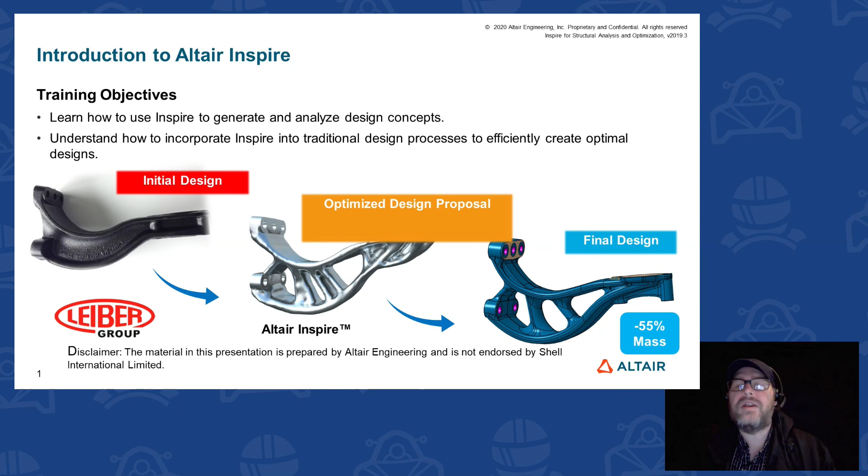So using the Inspire software, what we can do is we can take this original design and very quickly, very easily come up with an optimized design. This is an example of what Inspire is going to provide us. You see, it's removed portions of this material. It's determined where material is necessary and got rid of the rest of that material. And then from that, we can then come and engineer our own design, taking cues, taking information from the optimized design, come up with an engineered design right here that is an incredible 55% reduction in mass.

Another added advantage of using a simulation-driven design process is, compared to a conventional design process, which is to come up with a design, test it either virtually or physically, and then determine where it can be improved, and ultimately come up with a new design that we're going to test again - this can be a long process.

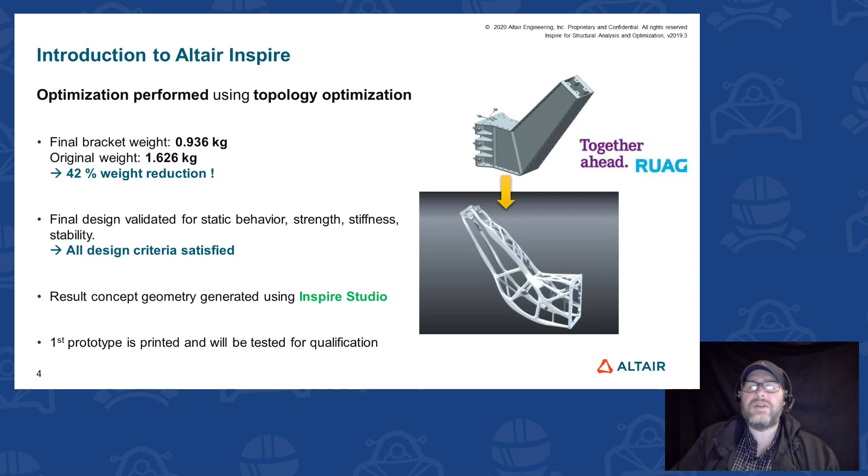So, as I promised, this is all I'm going to do from a slide standpoint. The rest of this is going to be a live demonstration of the software. So I'm going to open up the software here, and we're going to move on and do all of the things that are necessary to achieve these goals.

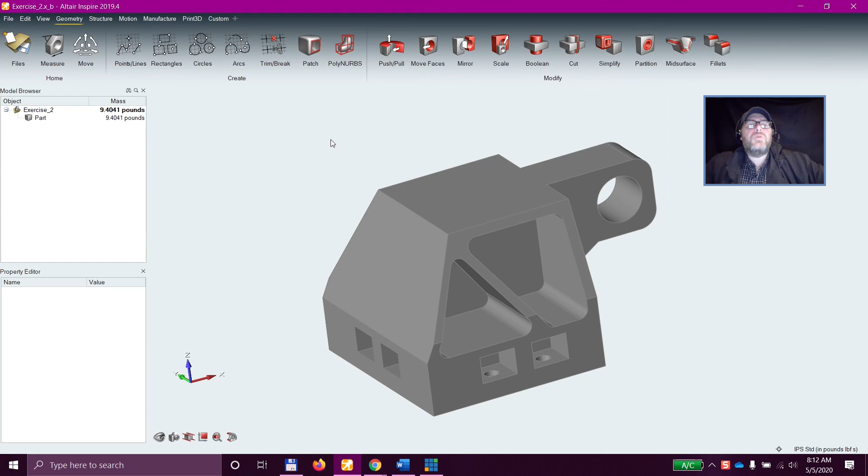So I've got my geometry here, and with this geometry, what I can do is come here and begin to set this up for an analysis. And to do that, the first thing that I want to do is make sure that this part is made out of the correct material. You can see it says 9.4041 pounds here. What I want to do first of all is I want to change the units that that's in. Changing the units is very, very easy.

All I have to do is come here to the corner, and in the corner here, I get a list of all of the common unit schemes. I'm going to move over to a millimeter Newton second unit scheme, and you can see it updates that. Because I'm working in millimeters and newtons, the mass is then going to be calculated in metric tons. But you can see if I instead switch to a millimeter Newton kilogram scheme, now it reports that in kilograms.

Units are very, very easy within Inspire. All I have to do is switch the scheme to whatever I want it to be, and the part will automatically update to that new unit scheme. All of the dimensions on the part will automatically change. Any loads, anything that I've put on here will automatically update to whatever unit scheme I'm in.

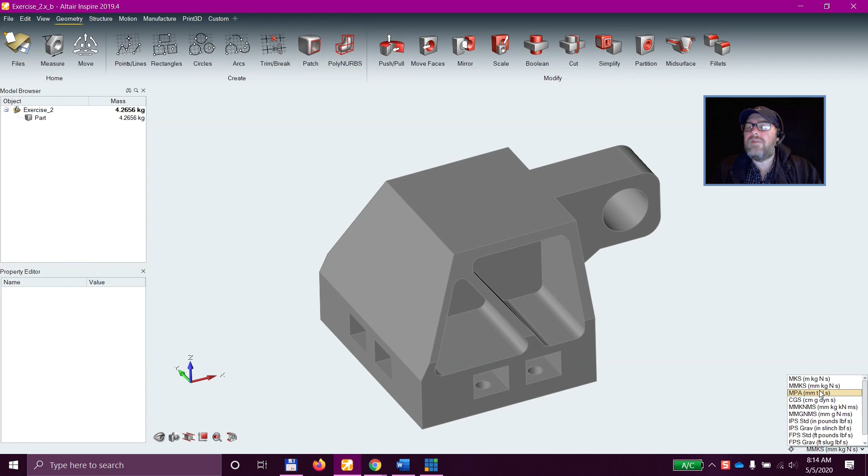So I'll leave it in millimeter Newton seconds right here. That way I know that my results are going to be in megapascals, and I can always quickly convert back over to kilograms just to get an idea of the weight, the mass here. So you can see we're at 4.2656 kilograms. The part is automatically assigned a material when it's loaded in, and that default material is a steel AISI 304.

But the first thing that I want to do is make sure that I assign this a material appropriate to my design. So if I right-click on this, you'll see I get a list. If I come to material, I get a list of all the materials here. Everything from steel, AISI 304, the default material, down through plastic, nylon, and ABS, which are useful for 3D printed parts. This all comes with the software. It's a library of materials that comes with the software, and I can select from any of those.

In fact, I'm going to select aluminum 7075 T6. And you see, as soon as I do that, if I switch back to kilograms real quick, you see we've had a tremendous weight reduction already just by making this out of aluminum.

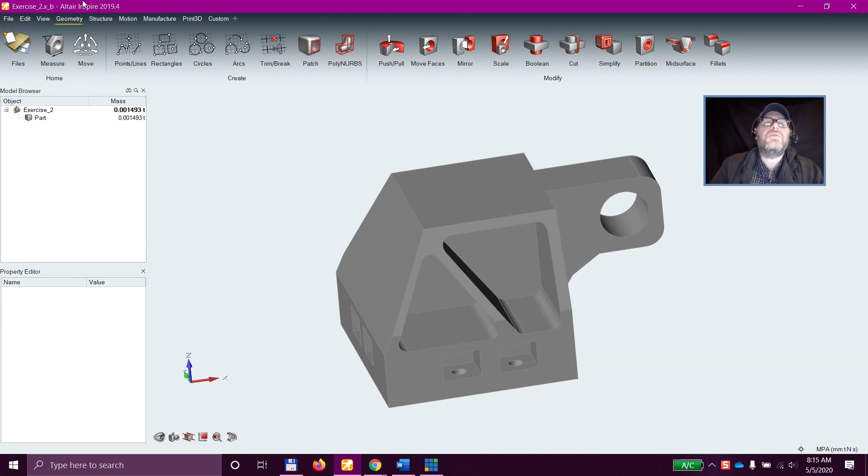But oftentimes, we're going to want to use a material that's maybe not on that list of materials. Especially if you have the specifications for the material you want to use, all we have to do is come to the structure ribbon here, come to this materials option. It's going to list all of the parts in my model and the material associated with it. But in this case, what I want to do is come over here to my materials, and you'll see I have two of them put in here. Douglas fir, I was doing some work with some wood, and then just one that says Erik's material.

All I have to do is click plus. It's going to add a material to this, and then I just need to enter in the values here. The E, the Young's modulus, the nu, the Poisson's ratio, the density of the material, the yield stress, and if I'm planning on doing a thermal analysis on this, the coefficient of thermal expansion. And as I switch from unit to unit, you'll see that those will adapt to whatever unit scheme I'm in. So we'll leave it in MPa.

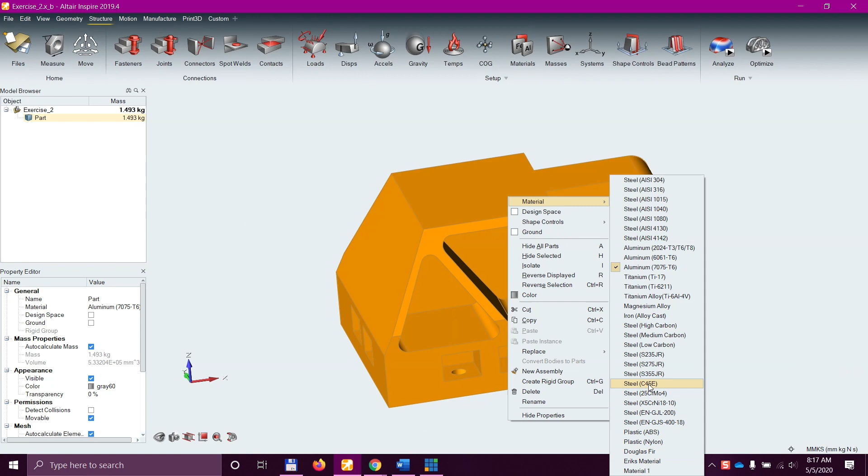And I would just put in the material specifications there. As soon as I do that, in the right click here, you'll see that new material is available in this library. So we can add as many of our own custom materials as we want. But as I said, I'm going to leave it on aluminum 7075 T6.

So ultimately, I'm going to want to optimize this part. I'm going to want to create a design that is as lightweight and efficient as possible, but able to support the loads that I put on it. To make sure that I am working intelligently, the first thing I want to do, though, is run a quick baseline analysis. It's always important to know where we are now, so that when we go to the optimization and we get an optimized part, we want to make sure it at least meets the specifications that I've got right now.

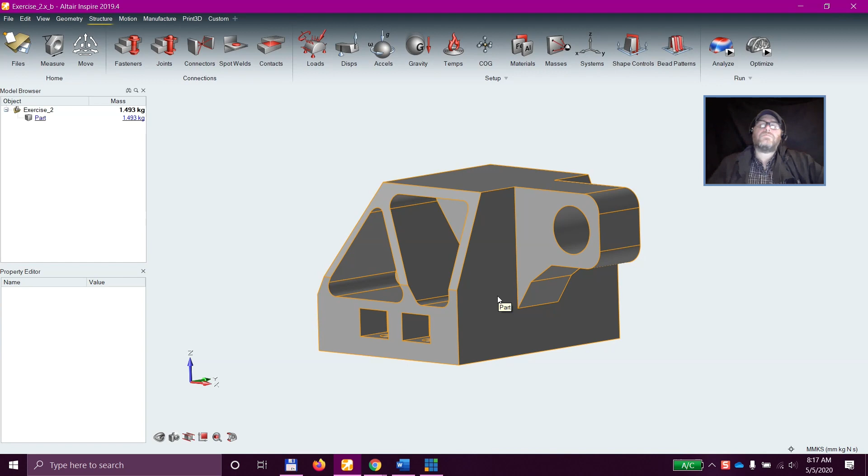To do that, I'm going to need to set this up to be a linear static analysis. Linear meaning we're dealing with material in the linear range, and static meaning the part is going to be held in place, fully constrained, but allowed to deform locally. And we'll get set up with that, but one of the first things that you're going to want to know as you begin to utilize Inspire is how to manipulate the part.

And the default mouse manipulation within Inspire is holding down the middle mouse button allows me to rotate the part. You'll see that little X there is what I'm rotating around. If I want to pan the part, I hold down the right mouse button and move it back and forth, up and down. I can pan that. And if I want to zoom the part, I just roll my scroll wheel. As I pull my scroll wheel toward me, it's zooming in, using the pointer as a focus, or push my scroll wheel away and it zooms out.

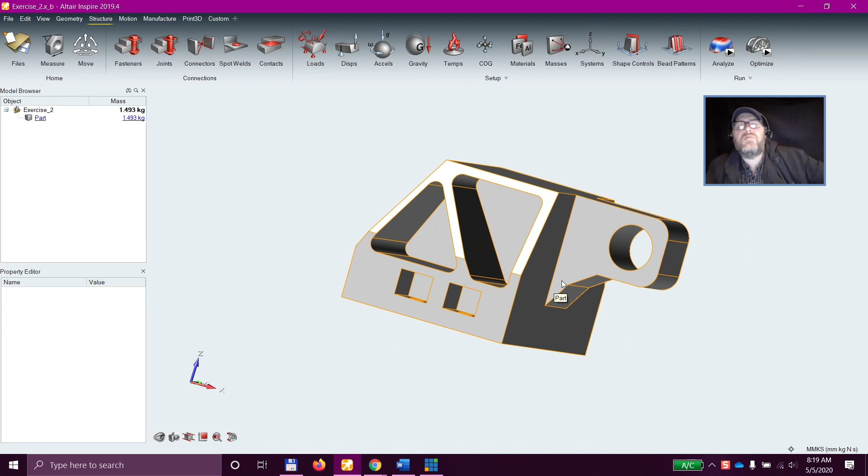But one of the most inconvenient things about moving from software to software, especially GUI-based CAD-type softwares, is every single software seems to have its own unique mouse manipulation. We wanted to get away from that. We wanted to make sure that a transition from a CAD software like SolidWorks or CATIA or UG, Pro-E, into Inspire was as seamless as possible.

If you come to the File pull down here, and you come to Preferences, and then you select Mouse Controls, you'll see that the default mouse control is what I explained here, and I can click on those and change those to whatever I want. But if I click that word default, it's going to bring up a list of very common CAD packages. SolidWorks, I know, is a very popular one amongst students. If I select that, you'll see it's going to say now default settings for SolidWorks.

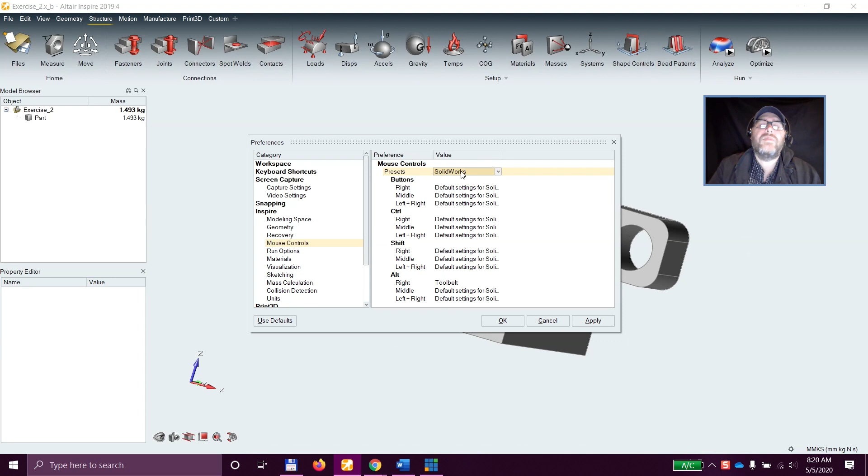So whatever the pan, zoom, and rotate mouse manipulations are in SolidWorks, now that's going to be the way that we do it in Inspire, which means moving from SolidWorks into Inspire becomes as seamless as possible. Now I don't use a CAD software, so I just stick to the default within Inspire. So I'm just going to select that, but hopefully this will make things a little bit easier, a little smoother, and a little more comfortable for you as you transition your geometry from your CAD package into an analysis tool like Inspire.

So with that said, the very first thing I need to do now to actually run this analysis is I need to indicate how the part's going to be held in place. I did say it was a static analysis. So for it to be a static analysis, we need to make sure that the part is fully constrained somehow.

And I'm going to make sure I'm in my structure ribbon here. And when I'm in my structure ribbon, I just come over to the loads icon. And you'll see when I'm in the loads icon, or many of the icons within Inspire, these icons are not just push a button and then open up another menu and then push a button and open up another menu. All of the functionality is right here on top of this icon, because what we were able to do was introduce the idea of what we call multi-function icons.

What a multi-function icon does is it takes very similar tools, very similar functions, and combines them all into one icon. So this is not just a button to push, but actually a collection of buttons that form this image. And we made it a very large, very descriptive image here. So if I want to create my supports, you can see I've got these little cones supporting my part. If I move on to that, they turn yellow or get a yellow halo around them, and that means I'm creating supports. If I come up here to this force vector here, I'm applying a force.

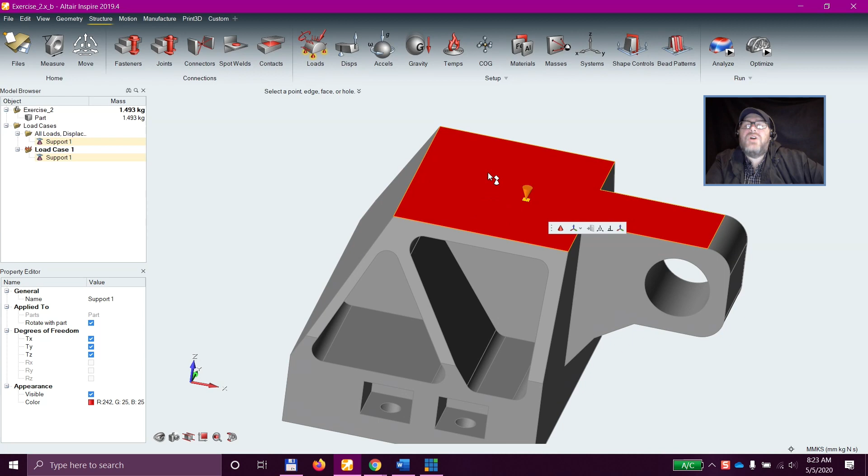If I double click on this, I get these little arrows here. Right now, since all of the arrows are faded, the part is fully constrained. But if I select any of these arrows, that arrow turns green. And now if I right click to get out of the function, I get these little roller wheels indicating the direction that this is now allowed to move. So I have freed it up in the direction, which happens to be the Y axis there. So it can't move up and down in the Z, it can't move forward and backward in the X, but it can move in the Y direction.

And if I need to free it up in a direction that isn't aligned with one of the cardinal axes, again, it's very easy. All I have to do is double click on that, and I come to this little universal moves tool here, and it allows me to rotate that about any of the axes, either in 5-degree increments or typing in whatever amount I want, and it will align to that. And you can see now the roller wheels are pointing into that direction, 37 degrees off of the Y-axis.

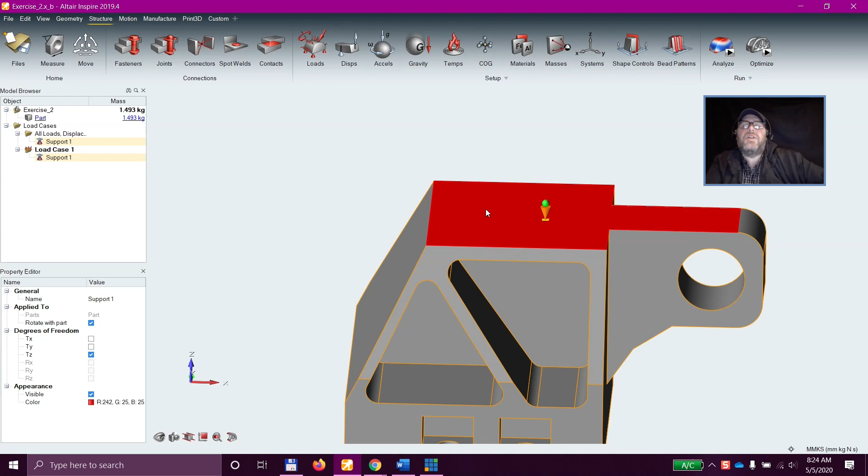If I select the other in-plane arrow, you see now I get this little caster wheel on here, and that now tells me that it's free to move in plane, but it can't move out of plane. So I can create very unique, very custom, very complex supporting schemes by manipulating those arrows right there. Now, of course, I don't want to constrain that in that direction. What I'm going to do is I'm going to constrain it down here in these bolt holes.

So when I'm in support, it did say I could do a point, an edge, a face, and those act the same, or a hole. And in this case, these holes are where this part is going to be mounted onto the aircraft. This is, as I mentioned, an aircraft door hinge bracket.

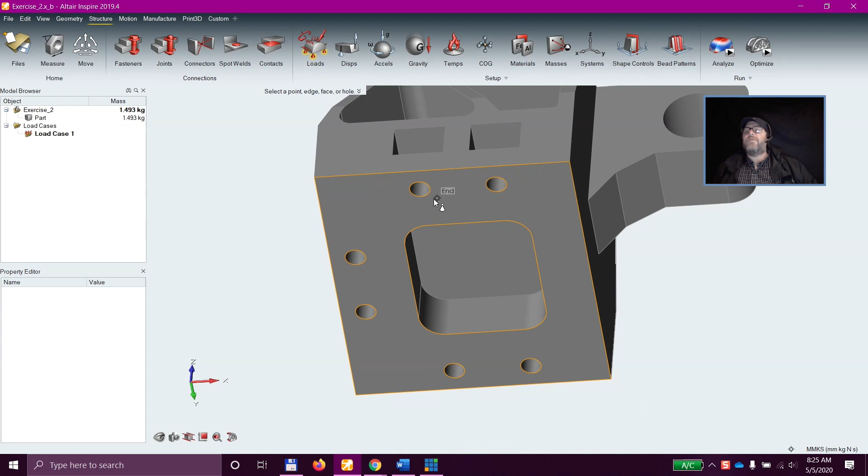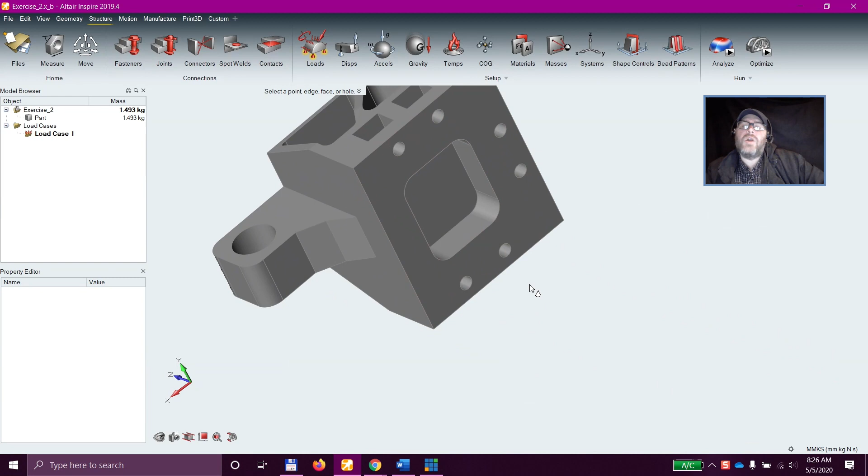So to make sure that I model this in the way that it's going to be mounted into the aircraft, what I want to do is hold on to these 6 bolt holes here, and I'm going to do that by applying my constraint, my support, to a hole. And when I click these holes right here, I get a slightly different icon than I was getting before. This icon is unique because Inspire is recognizing that this is a hole, and that there are typically unique properties to a hole constraint. The majority of the time we're either pinning that hole, so holding it in place with a pin, potentially a clipped pin, or we're bolting in that location.

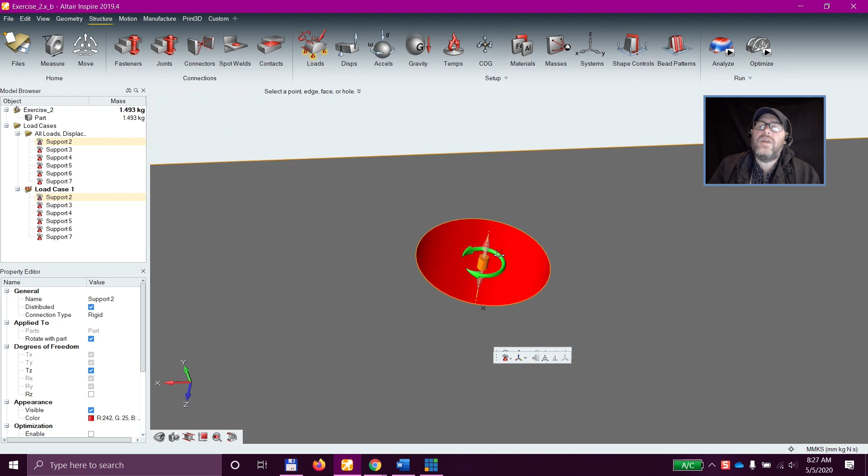So the constraint looks a little bit different, and if I double click on it, I get slightly different freedoms. The first of which is the rotation. If I free that up, I can allow it to rotate about the axis. So it's as if I've pinned it, but it's a clipped pin right now because it's not free to move along the axis. I can free it to move along the axis by selecting that. And those are the two freedoms that I can apply to a hole constraint, moving along the axis, rotating about it, either one or none. But no matter what, it will always be constrained normal to the axis, indicating that it's pinned or bolted in place. I'm going to leave these just as is.

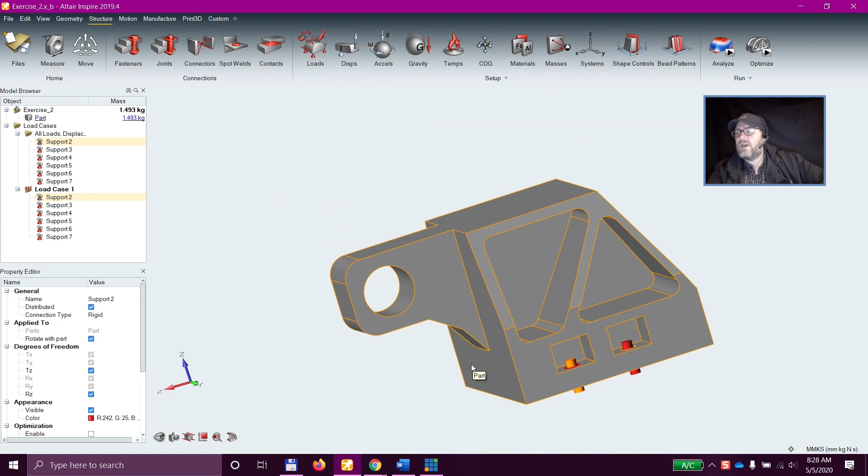And now what I've done is I've simulated bolting this in to the aircraft. It is now rigidly affixed in those locations, but the rest of the part is free to deform. That's important for a static analysis. And what's going to cause that deformation are the loads that we apply to this. So I'm going to come back to my loads icon, and like I mentioned, I can do a force that's going to be put onto a point, a face, surface, or a hole. I can do a pressure or a moment.

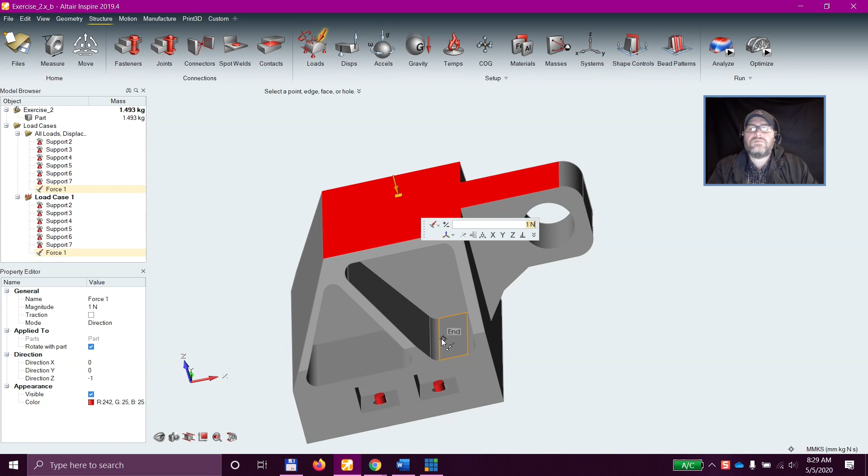I'm going to select the point force, and again, it says point, edge, face, or hole. And if I select a face, it will put that load icon wherever I indicated. But just like the constraint, because that entire face turns red, that means that this 1 Newton force is applied across and evenly distributed across that entire face. But let me select that. I'm just going to click my delete key to get rid of it. I want to apply it to the hole.

So I mentioned that the aircraft door hinge attaches to these holes here. So I'm going to put my force in the hole. It will put it at the center of the hole, but it will highlight that entire surface in red, indicating that the load is being applied to the entire surface. And I can select the direction I want that to go by selecting any of the cardinal axes, so X, Y, or Z, plus or minus to move it back and forth. Or just like I did with the constraint, I can get it generally aligned, come to my move force, and then rotate that in any of the axes to orient it in the direction that I want.

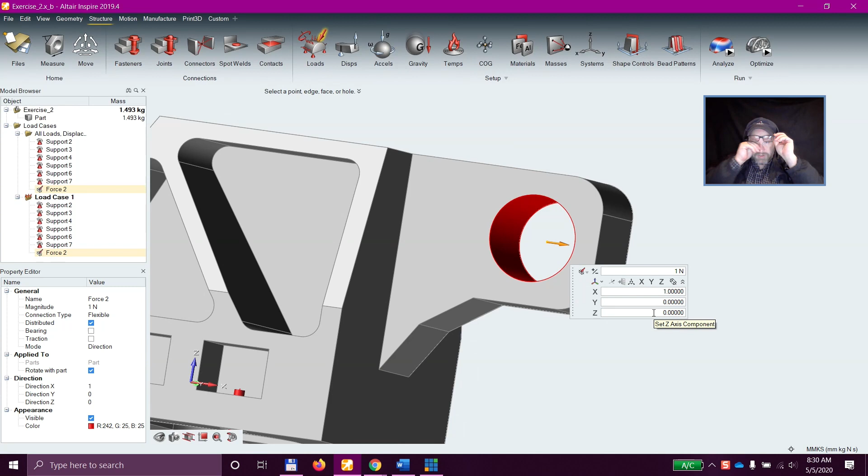And I would do that if I knew the angles off of the cardinal axes. Another way that I could do that is to use this little down arrow icon here. When I select that, you're going to see the portions of a unit vector. So if I know my vector components, I can come here and put them in. So say I know 3, 4, 5.

I'm going to align that using these as a vector for the orientation, but not touch the magnitude. Or if I switch this from a direction mode to a force mode, now these become not only components of the direction, but components of the magnitude as well. So as I change these, 3, 4, 5, it will not only change the orientation, but it will change the magnitude. So whatever information I have, I can orient this in the way that I want.

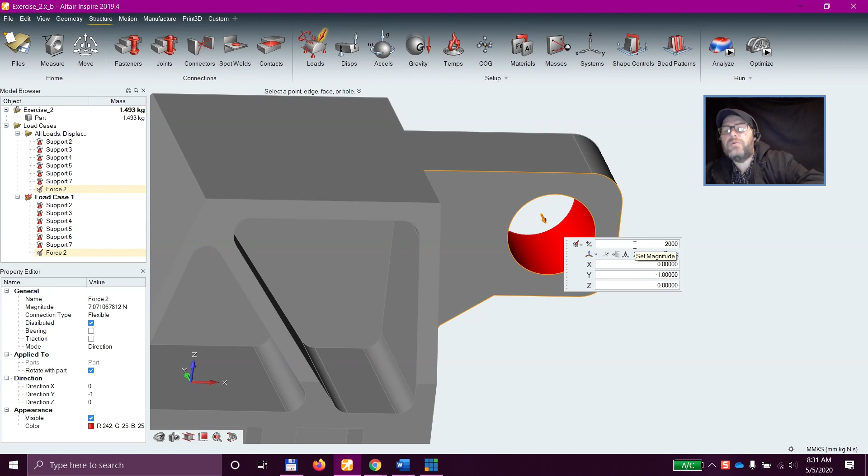What I'm going to do is I'm just going to orient this in the negative y-axis, and I'm going to put a value in here. So we'll say 2,000 newtons. Now this part is going to see multiple load cases. When this is mounted in place, this is going to represent a situation where the door is open, and the door hinge is pulling down on this.

But we're going to have another scenario where I'm pointed in this direction, and the arrow is going to be representing the force when the door is closed and that hinge is pulling on it. I've oriented it the way that I want. I can now again put in the value that I want.

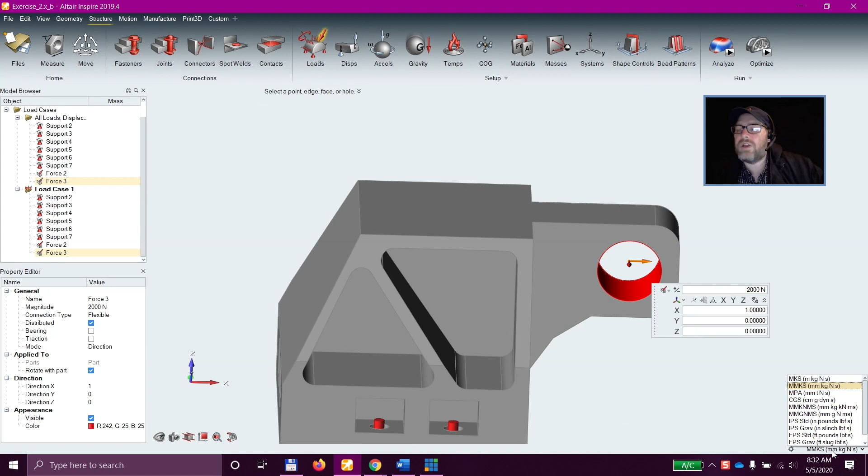But let's say, for instance, you didn't happen to know what the force was in newtons. Somebody had given it to you in pounds force. So I could go and do the calculation, go to Google and Google what is 500 pounds force in newtons. I could come down here and switch to pounds force, put 500 in, switch back to millimeters, Newton seconds, and have it convert.

Or if I come in here and just type in 500, if I clicked enter, it would be 500 newtons. But if I type in LBF for pounds force, you see it automatically converts that to newtons for me, or whatever my current unit is. So we do truly try to make units as seamless as possible within Inspire.

So now I've got my forces, I've got my constraints, I've properly assigned a material to this. The last thing that I need to do is differentiate between these two forces here. Right now, these are going to act at the same time, which of course is impossible. This door cannot be open and closed at the same time. But I do want to understand the behavior of this, and when I optimize this, I want to make sure that it is taking the information from both of these different load cases.

I'm going to come back to my load icon, and I'm going to select this right here, and I can add another subcase to this, another load case. And what that means is both of these will be analyzed, but they'll be treated as two separate events. So I will get two answers from the analysis.

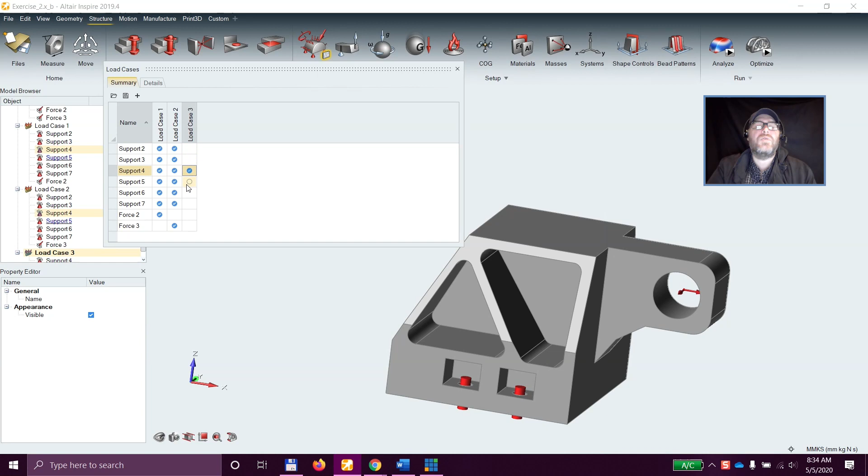I could even come in here and model a scenario where I'm going to assume that 2 of the bolts have broken, so I will not select support 2 and support 3. I'll just select these right here, and we'll say force 3, and I can continue to add different scenarios as I want. So now I have 3 different load cases, 3 different studies that I want to run.

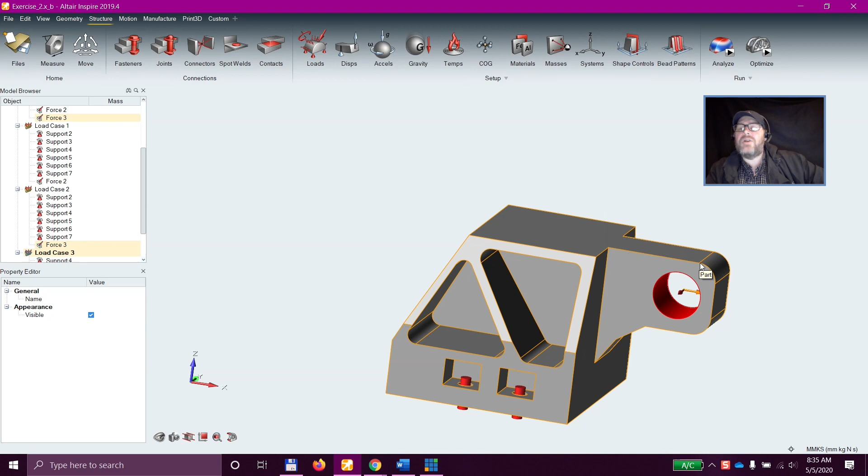I can apply what we call enforced displacements. Say I didn't know the load, but somebody loaded this up and measured that this point moved 4 millimeters. I could come to an enforced displacement, enforce a displacement on that point, say 4 millimeters, in whatever direction. That's the wrong way, so I'll click minus and move it down. You can see it's now indicated that point is going to move 4 millimeters. So what's going to happen is it's not going to load it, it's going to forcibly move that point 4 millimeters, and then I'll be able to find out what stresses incur as a result of that enforced displacement.

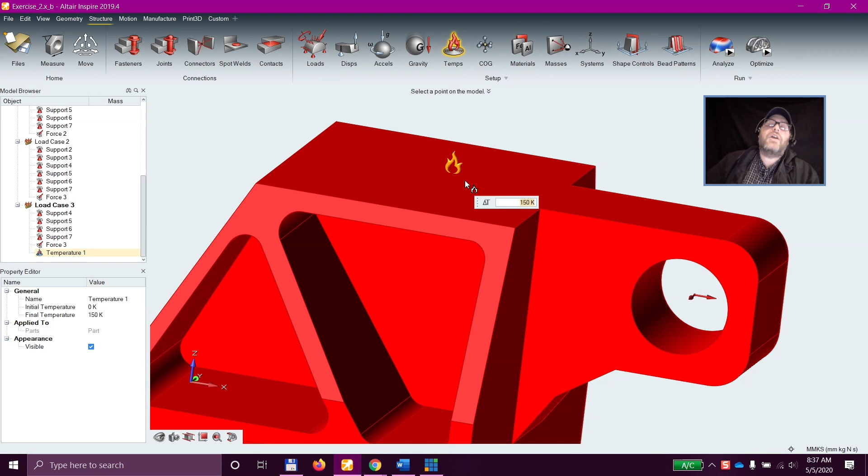Another way that I can load this part up: I can do G-loading, clicking on a part and G-loading it, or I can do angular velocities or accelerations. We'll come back to gravity when I come to run it. And I can do temperature loading. If I select that and pick my part, you see it indicates a delta T. So I could say 150 degrees Kelvin delta T, an increase of 150 degrees, irrelevant of what it started at. It's just a thermal load, so we'll get expansion if the heat goes up, and contraction if the heat goes down. I can do a thermal load as well, but let's delete that.

So those are the different loading scenarios that I can do. Everything is set up and ready to go. The last thing I need to do is just go and run it.

So the way I'm going to do that is move all the way down here to the end of my list, and we have our Analyze. If I click this little Run OptiStruct Analysis button, it's going to open up this window where I can name my analysis. If I'm going to be running multiple analyses, I always find it useful to change the name. Right now the name is just whatever the part name is, but I can change that, and that helps me differentiate between the different analyses, the different studies that I do.

You'll notice I haven't mentioned elements up till now. If you're familiar with finite element analysis, you know all of these analyses are element based. As a teaser for tomorrow's session, which deals with SimSolid, that's actually a geometry-based analysis tool. So stop by if you're interested in seeing an incredibly quick analysis that doesn't even use elements. But this is an element-based analysis, so it has automatically calculated a global element size. I can change that if I want, but I'll leave it alone.

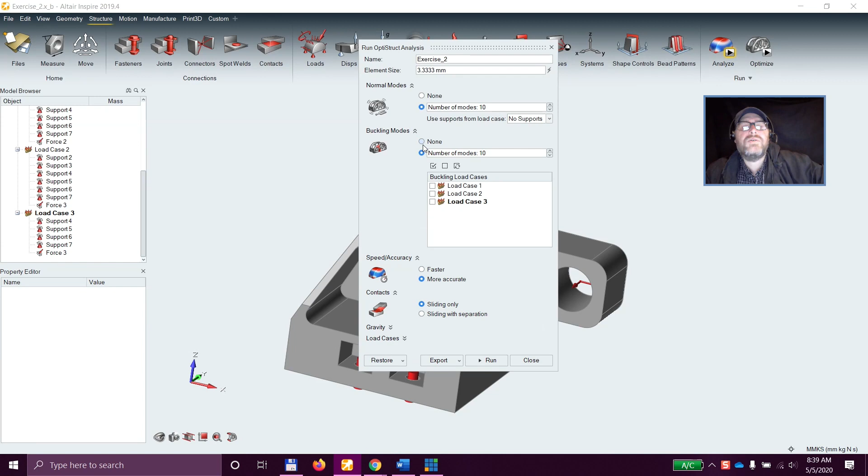Speed versus accuracy, I'm going to leave it at more accurate. I do want accurate results, so I want to make sure they're as accurate as possible. I always recommend doing it more accurate. The only time you'd want to do faster is if your analysis is taking an inordinate amount of time and you just want rough results quickly. The results will be good, but not as accurate as possible. If you're interested in the details, more accurate uses second-order quadratic elements, and faster uses first-order linear elements.

Contacts, we'll get to that in a bit, so I'm just going to leave that as is.

Gravity, do I want to incorporate gravity into this analysis? Right now it's set for no, and that is the default. What that means is it's just going to assume no gravitational effects. And on this part, that's perfectly fine. The part is relatively compact. It's not going to experience gravitational effects of any discernible amount.

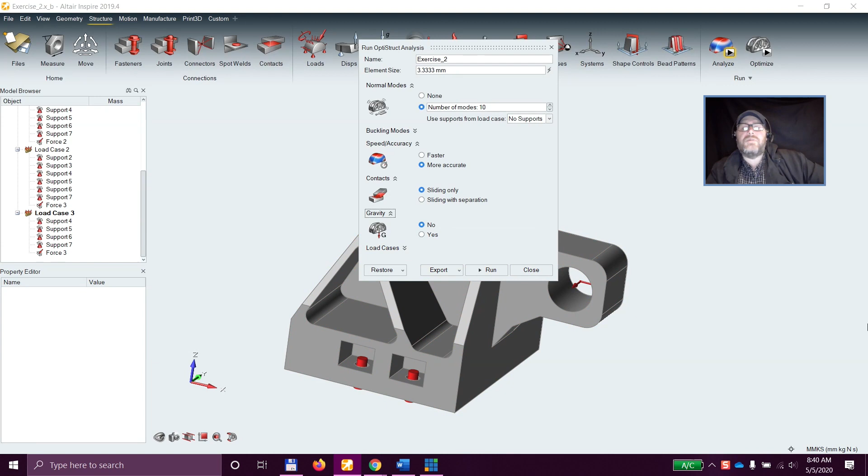If it was maybe something really cantilevered, I'd turn that on, and then I'd need to come here to gravity and make sure gravity is pointing in the correct direction. Right now it's not. In this case, gravity would be pointing in the negative z-axis.

And then the gravitational acceleration is set for Earth standard. Maybe someday we'll have Shell Eco Marathon Lunar competition, in which case we'd want to change this gravitational acceleration. But for the foreseeable future, we're doing this on good old Earth.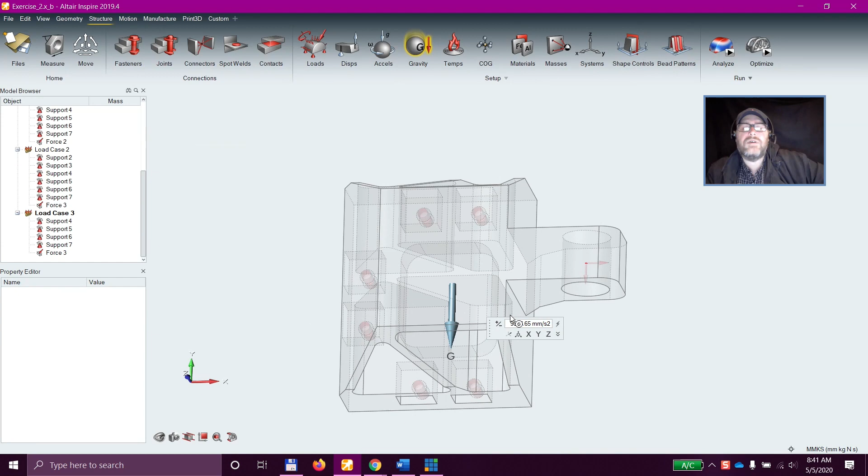So we'll leave it default for what it is. If you do need to do a G-load, don't mess with this. It's better to actually do a G-load up here where I can specify a specific G-load and just leave the gravitational acceleration alone. But as I mentioned, there are no gravitational effects on this, or no discernible ones, so I'm going to leave that off.

The final option here, load cases. Which ones do I want to analyze? I want to say all of them, and all I have to do is click run here, and we'll run the analysis. And what it's going to do is it's going to go through and set this up for an analysis.

Now, the power of Inspire is the fact that while this is incredibly easy to use, incredibly quick to set up an analysis, it's utilizing in the background our enterprise level tools. What it was doing was first it sent it off to our batch meshing, our auto tetrameshing tool, SimLab. SimSolid is what we're going to discuss tomorrow. SimLab is our tetrameshing, auto meshing tool to create a very high quality tetramesh.

Once it was done with that, it sends it to our pre-processing tool, HyperMesh, where it's going to actually take that mesh and then set up all the parameters for analysis, or as we ultimately get to it, optimization. And now when it's about two-thirds of the way across here, it's now sent it to OptiStruct, our high-end, very, very accurate analysis and optimization solver, and it's running that quick solution right now.

That should be done relatively quickly. It is going to take just a couple of minutes here, where it will return some result.

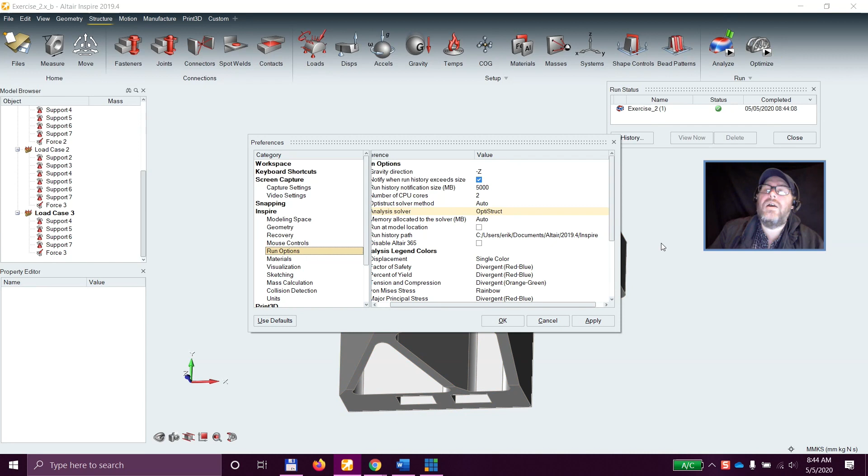But because I am taking this from an analysis to an optimization, I do need to leave it in OptiStruct so that we can utilize the incredible optimization capabilities of OptiStruct. And fortunately, in the time that I discussed that, it has completed. We get our little check mark here. We get our little green flag letting us know that we've solved, we've come up with a solution.

I click that green flag, it will automatically take me into post-processing mode. And in post-processing mode, I can view all of the different result types that I have: displacement, factor of safety, percent yield, and my stresses. And I can change that between the different load cases.

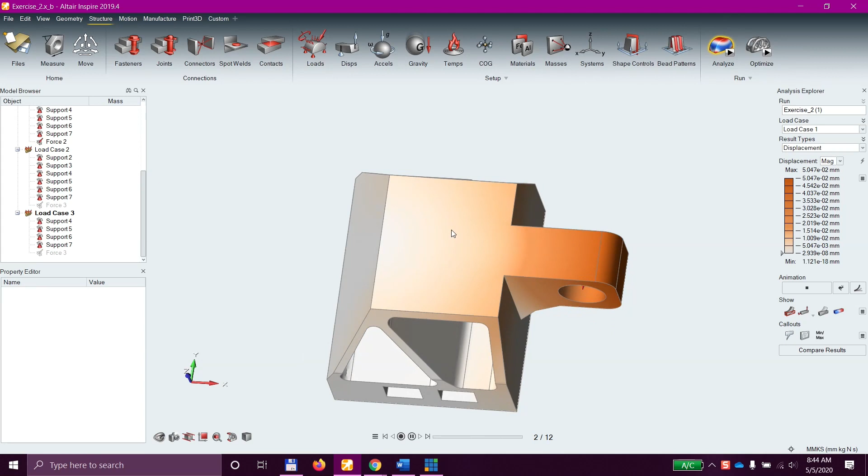Additionally, I can animate it. So if I click the animation, it's going to show me, based upon load case 1, what the animation, the deformation of this is. It is an exaggerated deformation. This is not how much this part is moving. We exaggerate it because we want to see the behavior of it.

If I come here and I see that this is actually 376.5 times scale, if I turn that off and select 1 time scale, you can't even see what the deformation is until you really zoom in very far. Not very useful to me. I need to understand the behavior of this, not necessarily the exact amount of deformation.

That I can get from my chart up here, my legend. These numbers are correct, but the animation is exaggerated so we can understand the behavior. I can come down and take a look at my stress.

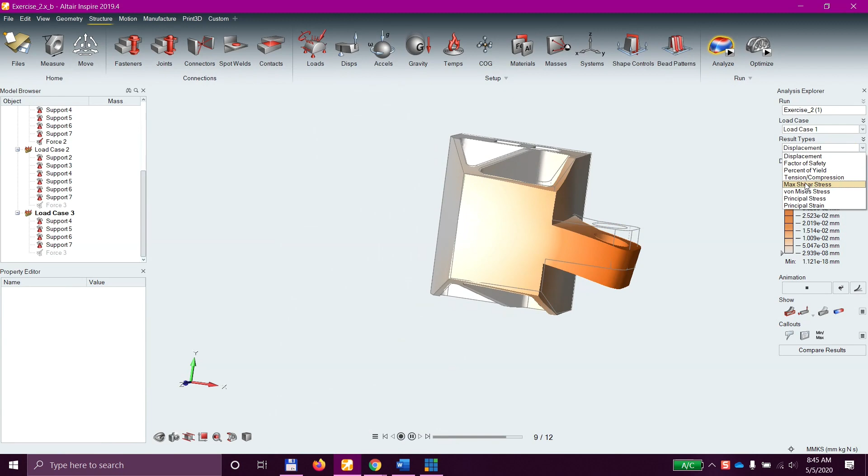When I look at my stress, I can see the stress on this. And then I can come and select my different load cases as well. So load case 1, load case 2, and then load case 3, which, as you can see here, is incorporating those broken bolts, so the part is moving from that.

I can also view factor of safety. Let me come back to my load. Factor of safety is going to take into account the yield stress that you put into the material definition, and it's going to tell you how much of a factor of safety I have with the forces that I put on there.

This is important for this part because you're going to see that I'm in the blue here, which means I am a minimum of 6 times factor of safety for the entire part, and I can isolate that by moving this down. What this does is provide a cutoff. Not very useful here because everything is above 6 times.

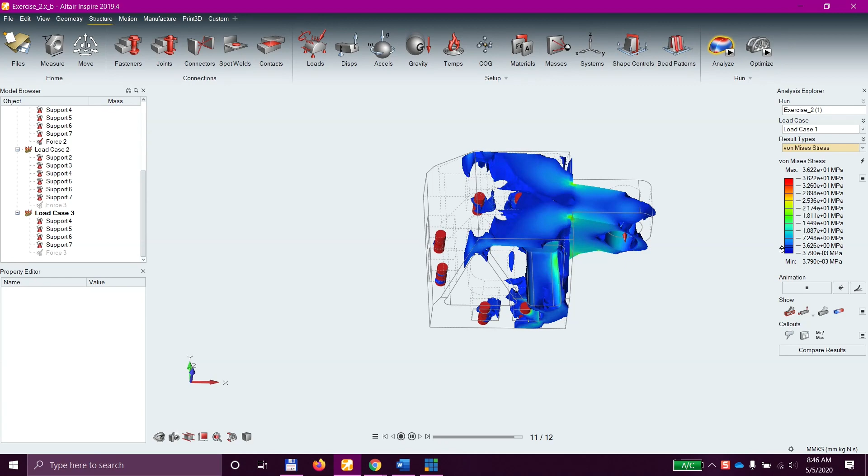Just to show you how that works, if I come back to von Mises stress, the cutoff allows me to isolate things by their value. So I can see the highest stresses here, and the highest stresses in this case are relatively low. In fact, like I said, I'm seeing a 6 times factor of safety on this part.

That's great. The part is very well designed. From a factor of safety standpoint, this is an incredibly designed part. The problem is it's over-designed. Way over-designed. There is no need for a 6 times factor of safety.

In a lot of cases, especially with something like an eco-marathon vehicle, if you have your parts designed with that high of a factor of safety, you are lugging around way too much material and not getting that super mileage you're looking to get. So while we always want to incorporate some degree of factor of safety, we want to keep it a reasonable amount that's going to guarantee we are designing to the type of stresses and scenarios we expect to see, with a little bit of extra safety built in.

So the reason why I did this is to find out how much room I have to improve this, and at 6 times factor of safety, I have a ton of room, which is going to lead nicely into my next section of the presentation, which is optimization.

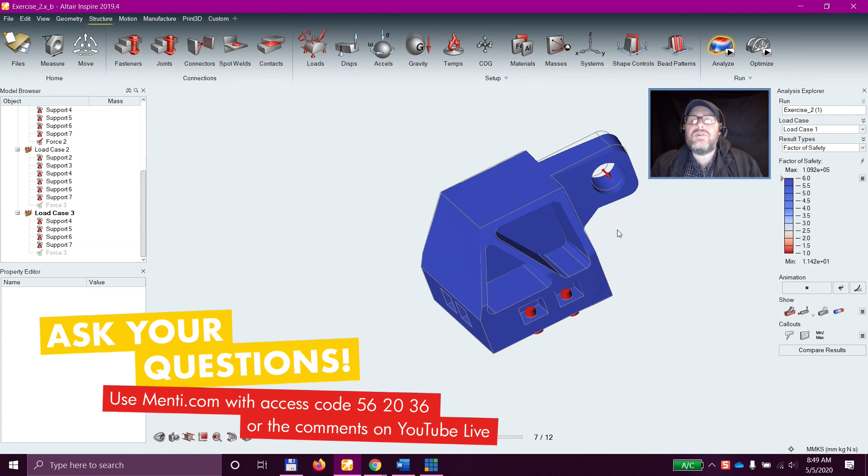Okay, so I've got my part here, and it is way over-designed. We know that, and I want to make sure I create an optimized part that is as efficient and lightweight, and not only lightweight but as strong as possible with the best material utilization. So I'm going to move into optimization here.

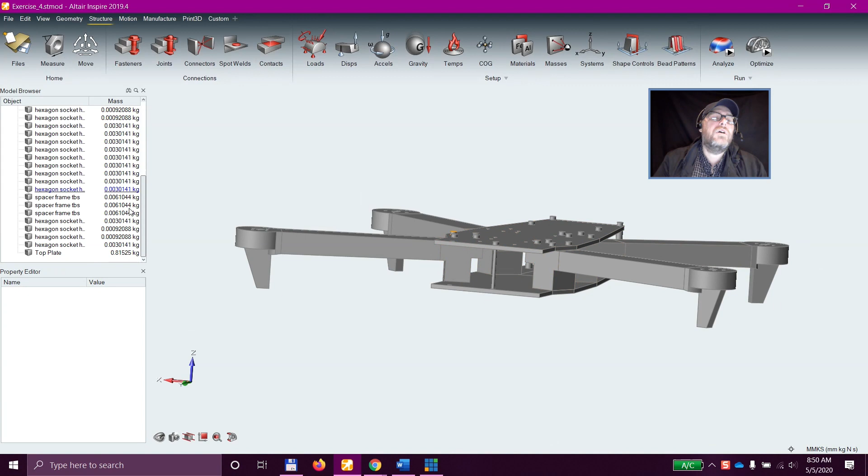Before I do that, I do want to mention one thing. This is a simple design, one single part here. But many times we have multiple parts that come together. So I'm going to open up this part, which you probably recognize as a drone body. I'm not going to do any analysis on this, but I'm going to use this part because, as you can see, there are a large number of parts that make up this design. Even these arms here are broken into separate solid parts.

When we bring that geometry in from CAD, it will maintain that design structure, organization, and part names. But when we have multiple parts that come together, we want to make sure we have one contiguous model, and Inspire does that automatically for you through the use of contacts. On the structure page, if I come here to the contacts, you'll see that all of these blue surfaces are what we call bonded contacts. Imagine you took those two solids, put an infinitely strong crazy glue on them, super glue, stuck them together, and now they are permanently bonded together.

That's going to make sure that this part acts as one piece. But in the case of this part, not only do I want it bonded together at these arms, I want an accurate representation of my design intent. And that's not what I'm going to get if it's bonded at the bottom and the top here, because the bonding is not what is holding this together. It's actually these bolts, these screws.

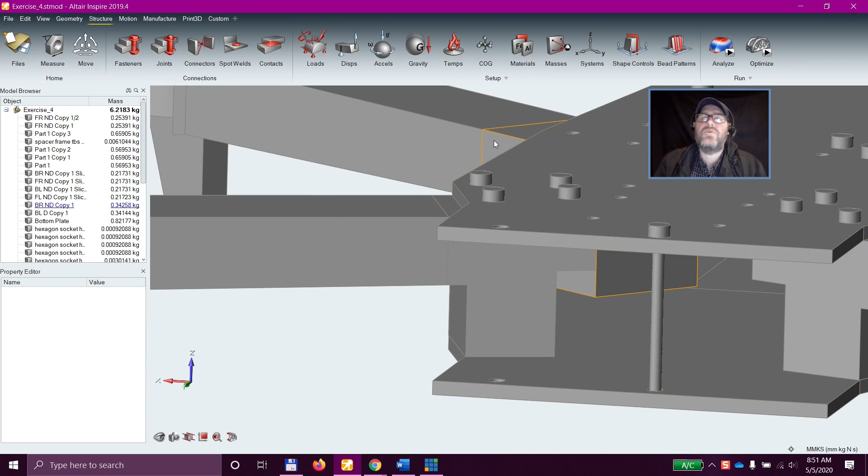And so by bonding it at the top and the bottom, I'm going to get a slightly unrealistic behavior. It will run, I'll get very, very close results, but it's not going to be as accurate as possible because these parts truly aren't bonded together. They're held by the bolts. So what I can do is, in a combination of the automatic bonding, I'm actually going to remove these geometric representations of the bolts.

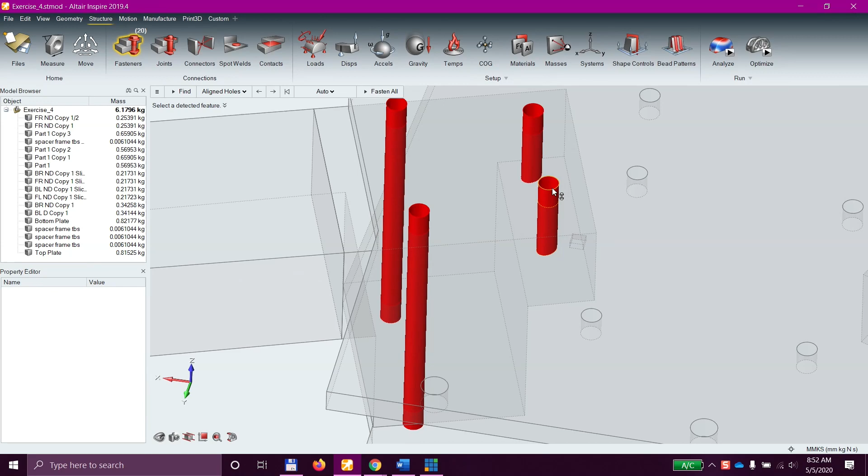So I'm just going to do a shift select and click my delete key. Those are going to go away. My contacts are still there. It's bonded, but the bolts are gone. But now if I come here to fasteners, it's going to automatically find concentric holes that run through the part, run through multiple parts, or a hole that runs through one part or multiple parts and then doesn't completely run through the last part. For these through holes, it's going to put bolts in. For these blind holes, it's going to put screws in.

When I click fasten all, it will put representations of them. And most importantly, what it then does is any surface that's affected by that bolting process, it's going to turn that from bonded to what we call contacting. So now these surfaces are free to slide along each other. So they're not bonded together, and that's going to force the force through the retaining bolt and not from bonding on these.

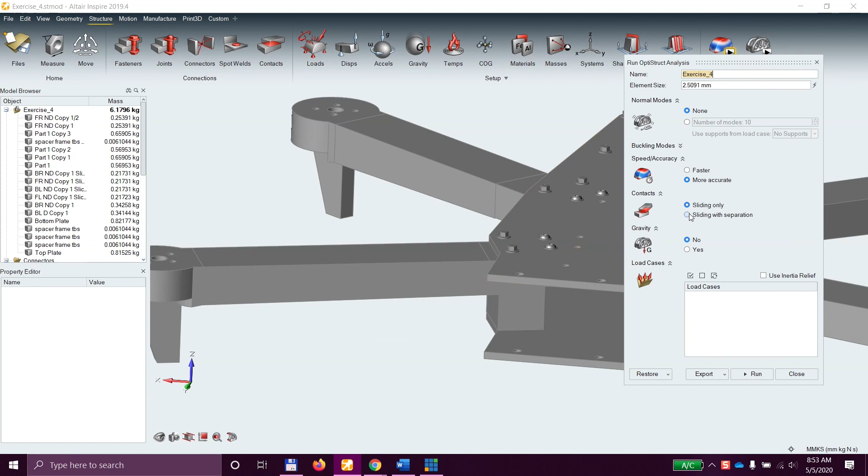And then when I come to analyze, if I change this from sliding only, which allows them to slide across each other, imagine two very, very strong neodymium magnets. You put oil between them, you squeeze them together, they can move like this, but can't pull apart. That's what we get with our standard sliding. If I do sliding with separation, that will allow these to separate if it detects that it's necessary. It will add some time to the analysis because it's constantly analyzing that separation, but we'll get a very, very accurate result on that.

But realize, had I not done that, it still would run perfectly fine. All the parts would be connected together. Any solids that touch will be automatically bonded together. But to get a slightly more accurate result, we were able to adjust that bonding by adding in our bolts here.

Okay, so what I'm going to do now is come back to my design here. And I want to optimize this. I want to find out the perfect design for this. I want to make sure that I'm utilizing just the material that I need and nothing more. So I want to optimize this part. Now, optimization, if you're not familiar with it, and it comes with a number of names, we call it optimization because that's what it truly is.

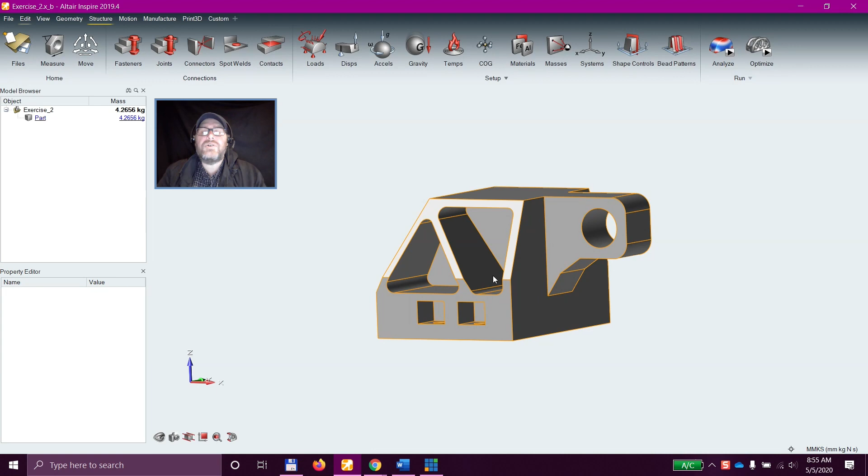I know that kind of the catchphrase these days is generative design. Generative design is just another name for optimization. We started the optimization process and the optimization craze 20 some odd years ago with our OptiStruct. And now there are a number of softwares out there that are kind of copying what we do, and they're doing an okay job at it. But the true optimization generative design capabilities are what you're going to find in our OptiStruct software.

But optimization in this case, or generative design, whatever you want to call it, its true name is topological optimization. And topological optimization is very similar to sculpting. So imagine you want to carve a sculpture. You're going to take a large block of material and you're going to carve away what you don't need. What people don't think about is when you're sculpting something, you're actually not creating a sculpture. You're simply taking the excess material that surrounds the sculpture that's in there and removing it. Well, that's what topological optimization is.

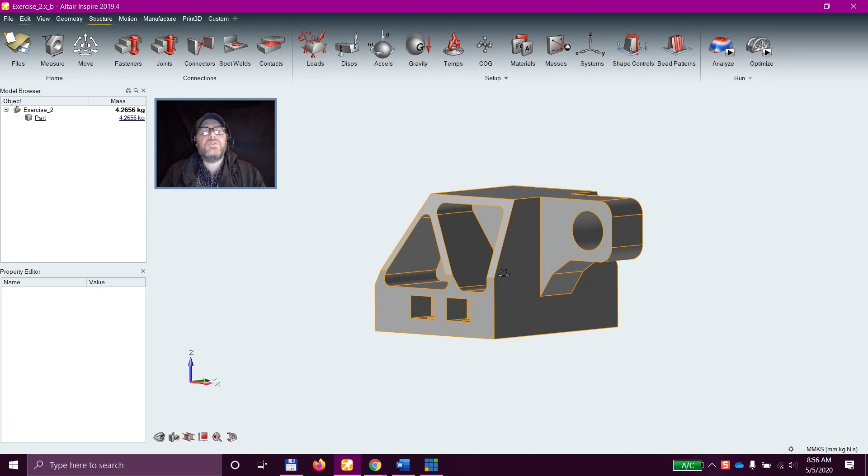I give it a large block of material and it carves away the unnecessary material. But just like if I'm going to do an artistic sculpture, I want to give it the largest block of material possible. I want to do the same thing if I'm doing this topological optimization sculpting. I don't want to optimize the part that already exists. I don't want to utilize their light weighting features. I want to give it a nice block of material that it can carve from.

And so I'm going to come back here to my geometry tab. And within Inspire, you could do this in your CAD package. This absolutely could be done in the CAD package. But there are some tools within Inspire that are actually easier to use than the CAD package. So create your initial geometry there, and then if you need to do any manipulation, do it in Inspire.

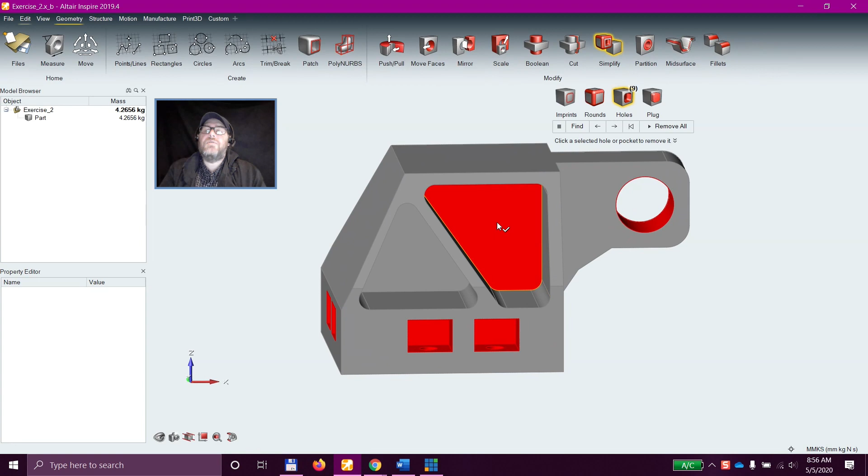If I come here to simplify and holes, what holes does is it detects holes in my part and I can fill them up. It didn't detect these, so all I have to do is double click in them. Click it one more time and it fills that right in there. And you see what I'm doing is I'm removing those light weighting features that were put in here so I can get that nice big block of material to carve my part from.

Next thing I want to do is I'm going to come here and I'm going to select my push-pull. So I'm going to grab this and I'm going to pull this out. So again, removing these light weighting features that were put in here. And now I've got this nice big block of material necessary for my optimization. This is an ideal part. Now we've added a lot of weight to this, obviously, by bulking it up, but that's fine because what we're looking to do is provide that base block of material that the optimization code can remove from.

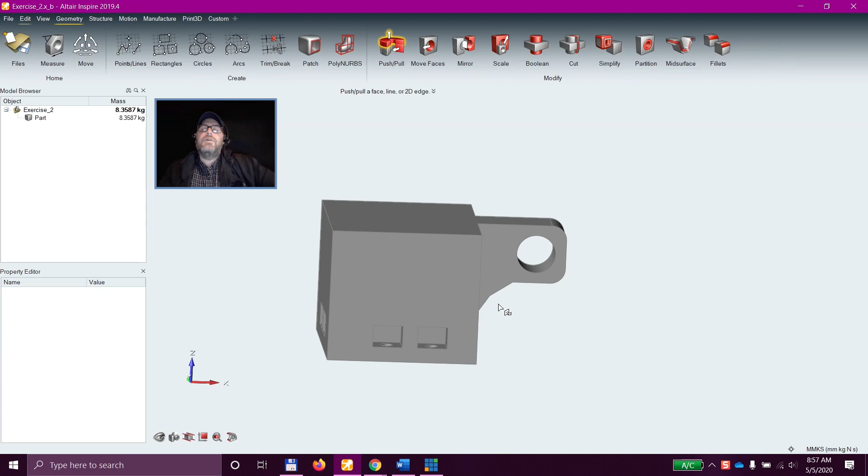But we're not quite there yet. One other very, very important aspect of this is the fact that there are aspects of this design that are critical to remain, that I can't touch. And what we do with those is we call them non-design space. These are regions, these are sections of geometry that can't be touched. And this hole, for instance, is one of them. I need a perfect cylinder here to mount to that door hinge.

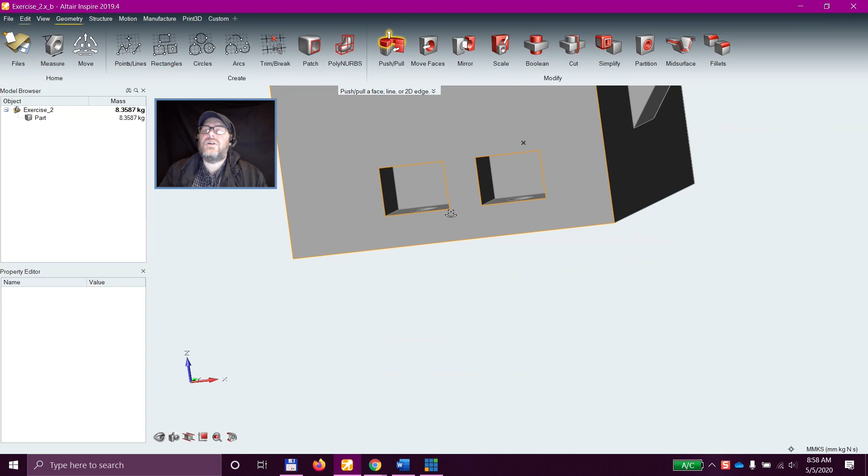In the case of my bolt holes, I need a perfect cylinder for my bolt to go through and hold this in place. If the solver starts carving away at that, I lose those perfect cylinders and suddenly my part is non-functional. So I need to protect them, and I'm going to protect them through use of a tool called partition. If I click on any geometry when I'm in partition, it partitions that out. I tell it how thick I want that partition to be. We'll say 5 millimeters.

And when I right click to get out of there, I now have a separate part here, which means I can right click on this main part here, select design space. And what it will do is it will set this as the design space, the material that I can carve from, but not touch this material here.

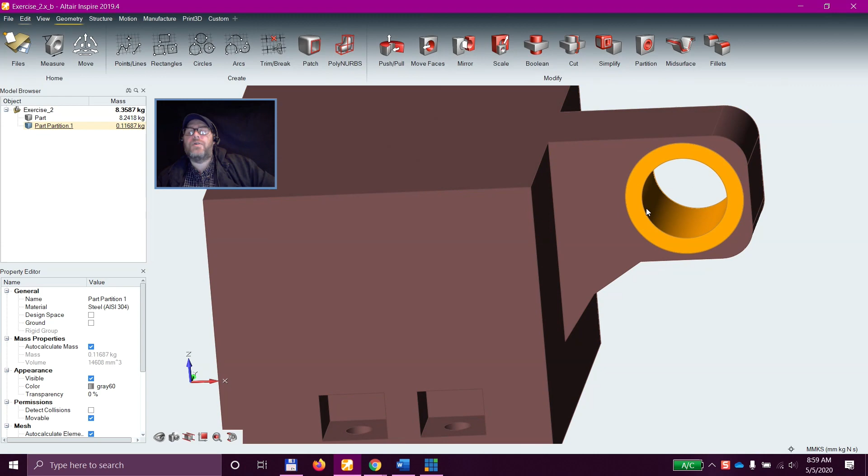The next thing I need to do is protect these holes. So I'm going to come back to my partition tool. One of the problems that I have is if I select it as is, it's actually going to protect this entire block here. I don't need that. I don't need the entire block protected. What I need to do is just make sure there's no material here so I can get a tool in here, and that's already taken care of by having that cutout there. I just need to protect the bolt holes.

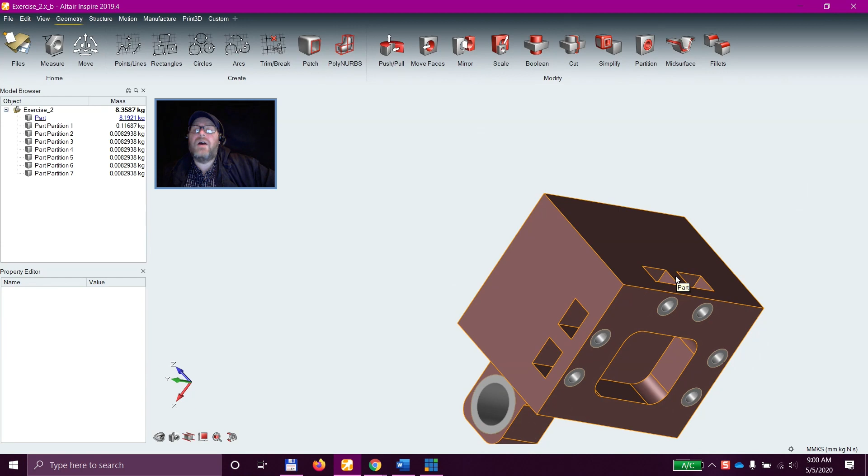So by holding my control key down and selecting these bottom faces, I can select those bolt holes there, rotate my part around. Again, click my control key, remove those bottom faces so it isolates my bolt holes. Bring that around again, remove these, and protect those. And now you can see I've got all of my critical parts protected, and the rest of my part is set to optimize however the solver feels is necessary.

So this entire red portion can be carved away, just like a block of marble when I'm creating a sculpture. But these gray areas can't be touched. They have to remain. So that's the basic, initial setup for an optimization. We still have a little ways to go, but it's as easy as that to take our current design and convert it into a good design and non-design space shape. But now I need to come back here to my structure because now I need to define some other parameters for the optimization.

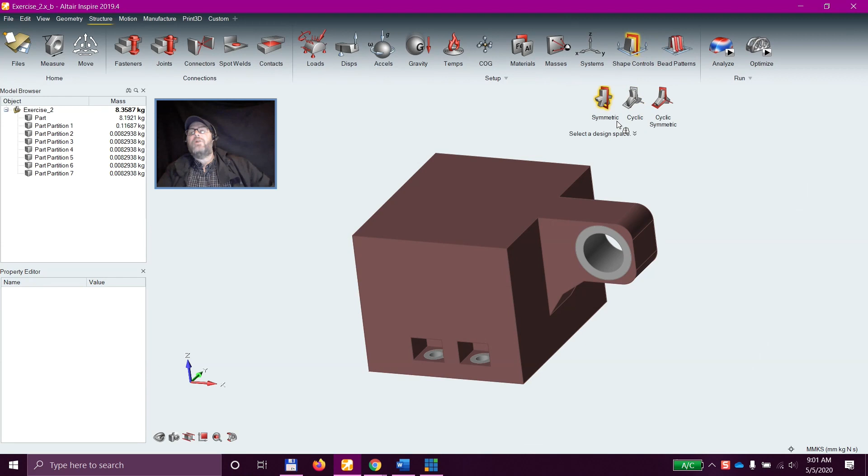Now I said that we can specify some constraints on this, not the types of constraints that hold it in place, but optimization constraints. And those I will find in this shape controls function here. With this red square thing here, I get what we call symmetric constraints. What symmetric constraints do is they guarantee that the part is symmetrical about whatever plane I specify.

So if I click my part, it's going to put 3 planes of symmetry on there. 2 of them I don't want. I don't want it to try to be symmetrical about that, and I don't want it to try to be symmetrical about that, but I do want to make sure that my part is symmetrical about the midplane, and what that does is it allows me to take this part and make it universal.

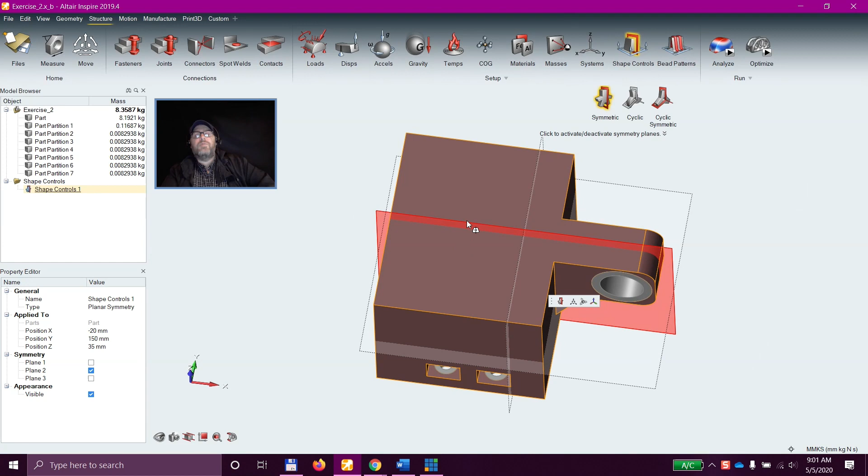So no matter which orientation I want, either mounting this way or mounting this way, I can use the same part for all of the different door hinge brackets on my aircraft because it will be symmetrical about that plane. So we'll guarantee that it's strong in both directions.

The next option I have here, this little blue square with the little arrows on it, is our manufacturing constraints. Now I'm not going to apply a manufacturing constraint to this, but what the manufacturing constraints do is they guarantee that my part is able to be created in the manner that I look to manufacture it. And the main types of manufacturing we have are single draw, split draw, extrusion, and then we'll come to overhang in a little bit. But from standard traditional manufacturing, we've got drawing and extruding.

Drawing is, imagine it's a cast part. So you have a negative volume cavity, you pour some sort of liquid material in it, you allow that to cool, and then you need the part to come out of that cast. To do that, it needs to make sure, kind of like we see here, that we have angles that go in the direction of the draw, and we have no overhangs or undercuts that would prevent that from coming out of the part, out of the die.

That's a single draw. A split draw works the same way, but imagine 2 parts coming together, one coming from the bottom, one coming from the top. And it allows parts that do come out at the wrong angle, but as long as they meet at the parting plane, the part will work. Extrusion guarantees that we have a constant cross-section all the way through the part. The vast majority of extrusion constraint analyses are when we're looking to do a laser cut or a water jet cut on our part.

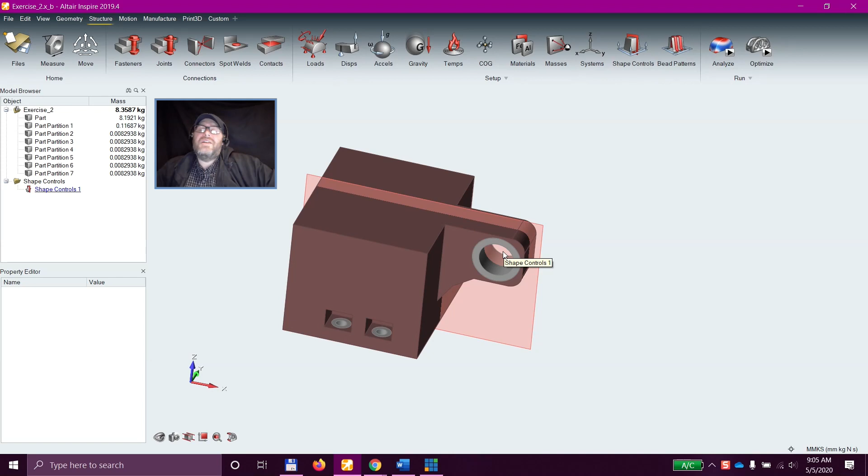The analysis happens relatively quickly. It usually takes about 5 to 7 minutes to run this analysis. Sometimes it can go longer. But it's 5 to 7 minutes we really don't have. It's 5 to 7 minutes that's best spent going through some other things. So I'm just going to bring up the end results.

But what I would do at this stage is actually put those loads and those constraints back in there. Make sure that my material is set for what I want it to be, the aluminum 7075 T6. And then I would come here to my optimize.

When I come to optimize, I now get this menu here, which allows me to specify the parameters of the optimization. And there are some values that we need to set to make sure that our optimization is run in the way that we want it. And there are two main things that we need to specify when we set up an optimization. First of all, an objective. What are we looking to do? What is our ultimate goal here?

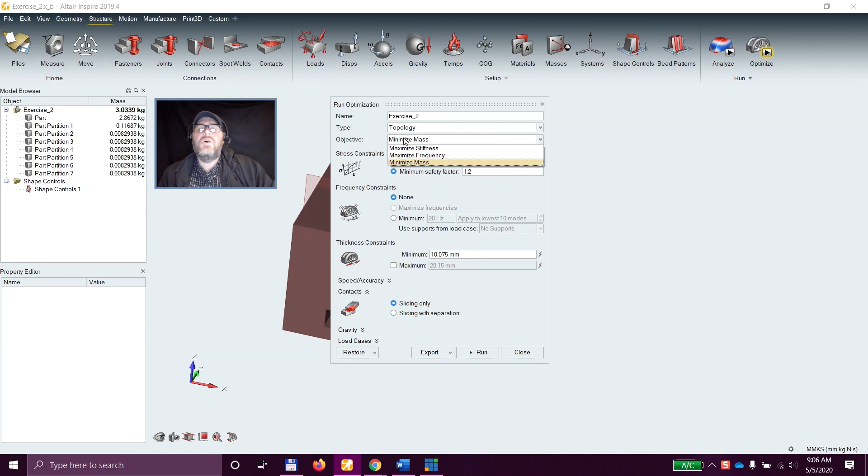And in the case of this part, we either are going to use maximize stiffness or minimize mass. What is our ultimate goal? In the case of maximize stiffness, what it's going to do is it's going to optimize this part to make sure that the part is as stiff as possible.

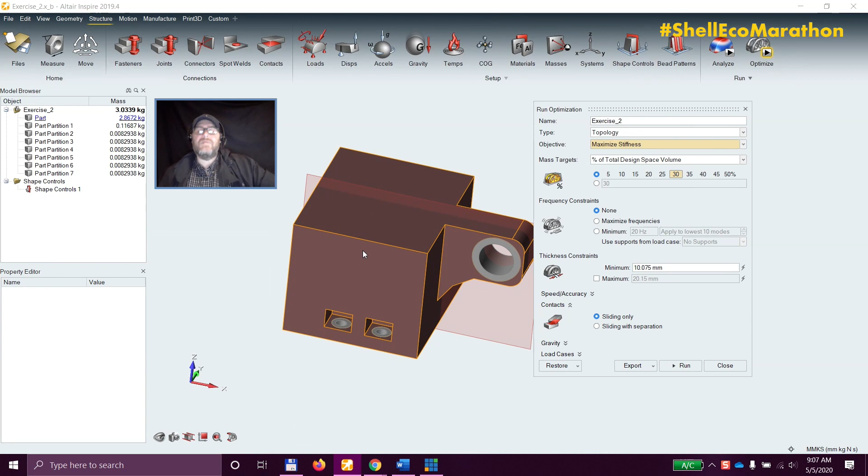But just setting an objective isn't enough, because if my goal here is to maximize the stiffness, it's going to analyze this and it's going to say, yep, your part's as stiff as possible. So I need to provide some sort of limitation to it, some sort of constraint. And in this case, the constraint is a mass target. I'm going to say, make the part as stiff as possible, but you only get 30% of the material to do that. It will remove 70% of this big block of material, and the remaining 30% will be as stiff as possible.

And 30% is a good place to start. It may not be the end. It may be that you're going to want to adjust that once you see the results, but it's a good place to start. Now, the other option I have is to minimize mass. So with minimize mass, I'm no longer telling it how much material to remove, because now my goal is to get rid of as much material as possible.

But again, without any constraint, it's going to say, okay, get rid of all of the design space, and there you minimize the mass. So I need to give it some sort of limiting constraint. In this case, it's a stress safety factor. It will take the yield stress of the material, and it will divide that by my safety factor and say, okay, this is as high as the stress can go. And as it begins to remove mass for the minimize mass objective, it will limit the amount of material and the location of the material as that stress begins to climb.

I can also apply frequency constraints, setting a minimum frequency, or if I'm doing my maximize stiffness, I can set a maximize frequency. So tell it, I don't know what it's going to be, but at least make them as high as possible. Thickness constraints are how thin any individual member can be as I carve things away, and everything else is the same as in the analysis. So once I set my parameters, in this case, it's going to be a minimize mass with a stress safety factor of 1.5, and I click run.

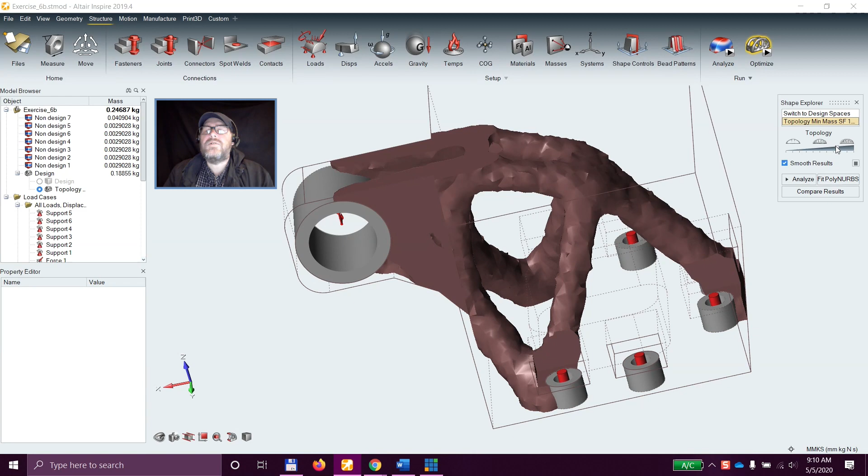Maybe a little bit ambitious, so I'm going to use my Shape Explorer here that comes up when I'm done with the result. I'm going to beef that up just a little bit so I get some nice robust members. These members here are what we defined with this minimum thickness constraint. That's how small any of these can get, and they got a little bit smaller than I'd prefer. So by just moving this slider, I can beef them up a little bit. Now I'm at somewhere around 0.35 kilograms. That's a part that I'm pretty happy with.

But how do I know? How do I know that this is good? Well, all I have to do here is come here and click Analyze. What this is going to do now is it's going to take my part configuration as it is, and it's going to now run an analysis.

So just like we ran the analysis initially, it's going to take those loads, take those constraints, and it will run a quick analysis on this. This should only take just a couple of minutes here, and then I'll be able to see the results of this exact part in its exact configuration.

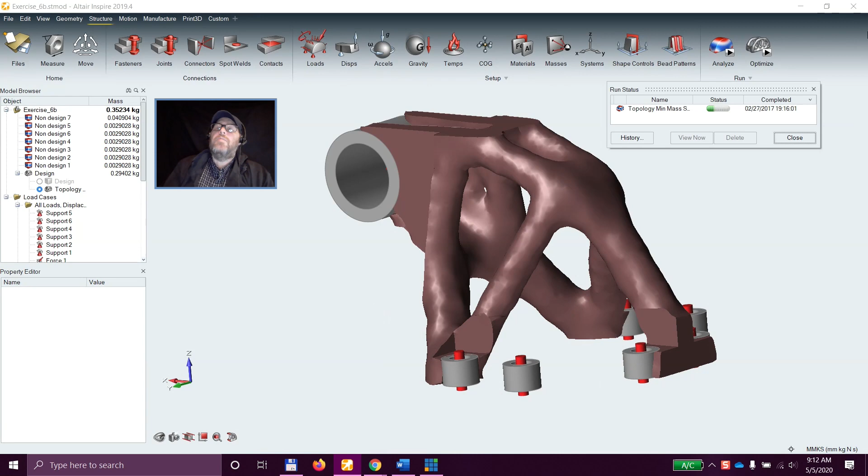While it's doing that, something I might mention, what a lot of people notice, one of the first things they notice, is that it seems to have completely abandoned these two constraints here. And it's done that because this part was run with a minimized mass optimization. And the minimized mass, its goal is to limit stress or minimize the mass with a stress constraint on it.

And what it determined was by putting material connecting here, that material utilization was doing nothing or doing very minimal to reduce the stress in the part, so it decided that it wasn't necessary. Had I run this as a maximized stiffness, it absolutely would have grabbed onto these, because to make the part as stiff as possible, it's going to grab onto everything and anything it can possibly grab onto to make the part as stiff as possible.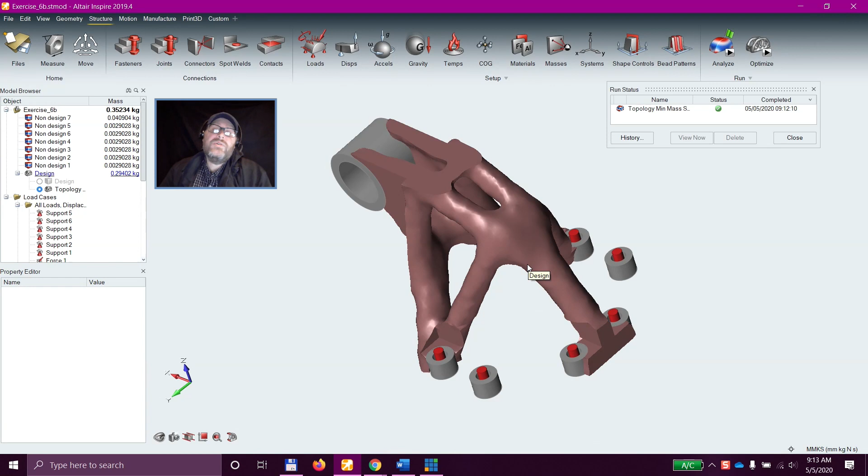And what a lot of people will do is they'll run both. You'll see that you'll get a similar shape, but slightly different with the minimized or maximized stiffness. And I can't stress this enough, there is no software out there that will or should be doing the design process for you. This is a tool, just like any other engineering tool you use, to help you better understand information about your part and help you come up with a better, more robust design.

But don't let anyone sell you on the idea of a software doing the design for you. What many engineers will do is take the information from this, take the information from the maximized stiffness analysis, combine them together, and engineer a part from that.

But to see whether it is surviving my stress, my analysis is done. I just can come here. I can come to my von Mises stress. You can see there is a bit more stress on here. In fact, there's some relatively high regions of stress, but those are because of the sharp angles here.

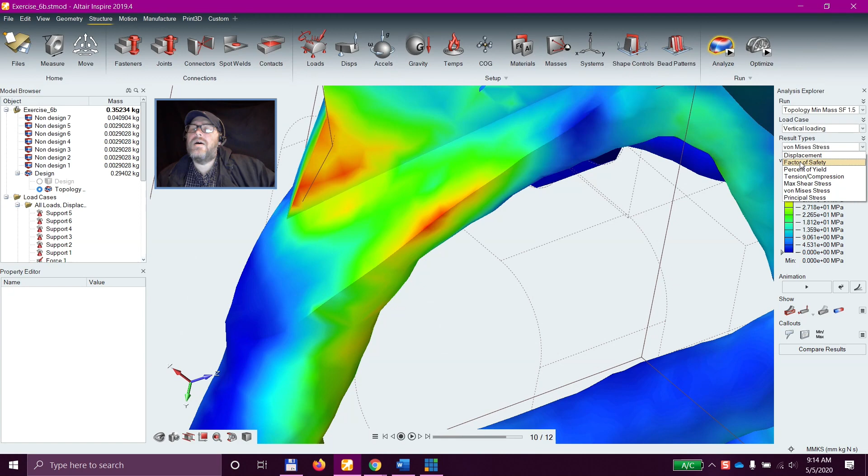I left those in because I want my design space to be as kind of blunt as possible, as blocky as possible. I know that when I'm actually doing my part design, a simple fillet put along this corner is going to take care of those. But most importantly, if I come here and take a look at my factor of safety, my factor of safety has reduced.

Still, a large portion of the part is at 6, but as I get further and further down, you can see right when I get to about 1.5 times factor of safety, everything disappears. So I've got my 1.5 times factor of safety, but my part is now optimally designed. I have significantly reduced the overall mass of the part, but still maintain the safety factors that I need.

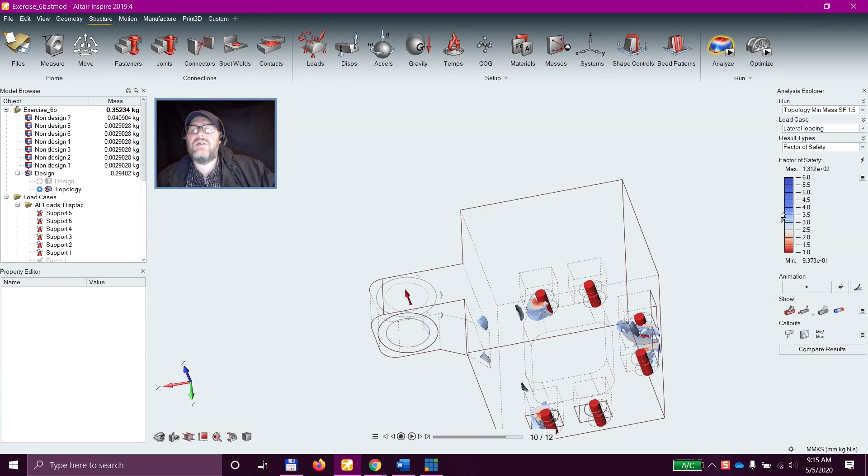And I can look at both of my designs here, and you see everything goes away at that critical 1.5 times factor of safety that I asked for. So my lateral loading is a bit more stressful on this design, but even with that, I'm getting the stress limitations that I specify.

So ultimately, I now have reduced the mass of my part significantly. I've made the part lighter. I've probably made the part cheaper because I'm not wasting a bunch of material. I've made the part greener because I'm no longer utilizing that amount of material that I was using before.

And I've made the part better for my vehicle because in this case, in this aircraft, I'm now only lugging around 0.35 kilograms for every single door hinge bracket as opposed to over 3. So I will either get better fuel economy on my aircraft, or it will allow me to put more passengers or cargo, which do pay to fly. Aluminum doesn't pay to fly. So I'm going to get better performance out of my aircraft as a result of this.

If you think of it in terms of a super mileage vehicle, or any vehicle for that matter, the lighter weight you can make things, the more mileage you're going to get out of it, the better the fuel economy, the better the energy efficiency. But, and I can't stress this enough, it is intelligently designed driven by simulation, so that I meet my requirements, I meet my stress requirements, but minimize the amount of material that I'm going to use.

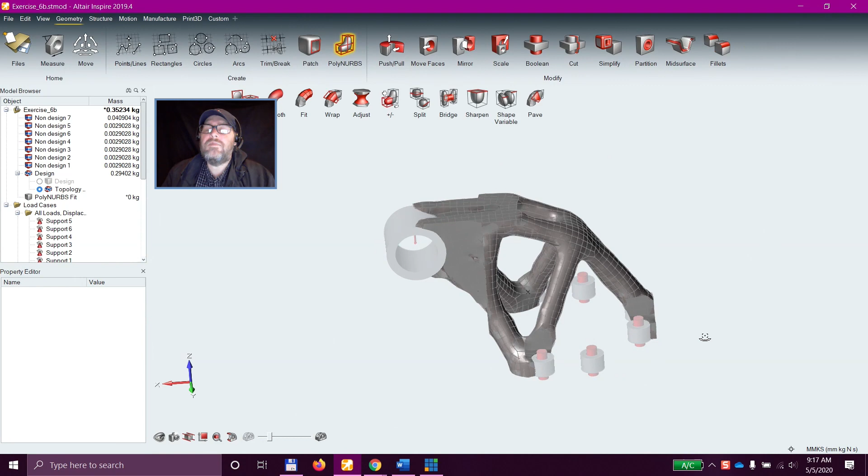Now, where do I go from here? What I can do is click this Fit PolyNURBS. It will wrap geometry around this part, creating a solid from this.

I can export that solid. So come here to Save As, and I can bring that into a CAD system, manipulate it, modify it, smooth it up, clean it up within my CAD system to come up with a design part, or within Inspire itself. I need to wait for this to finalize, so that'll take just a second.

There we go. Within my design here, I can also create some very clean geometry using PolyNURBS. Not the automatic, but what we call wrap, where it analyzes the cross section of the part, and I can create these nice tubular features.

I can connect them together by bridging them. So I can say bridge this surface to this surface, and it bridges them together, and I'd go through and do that to the entire part, and I would end up with a part that looks very similar to this.

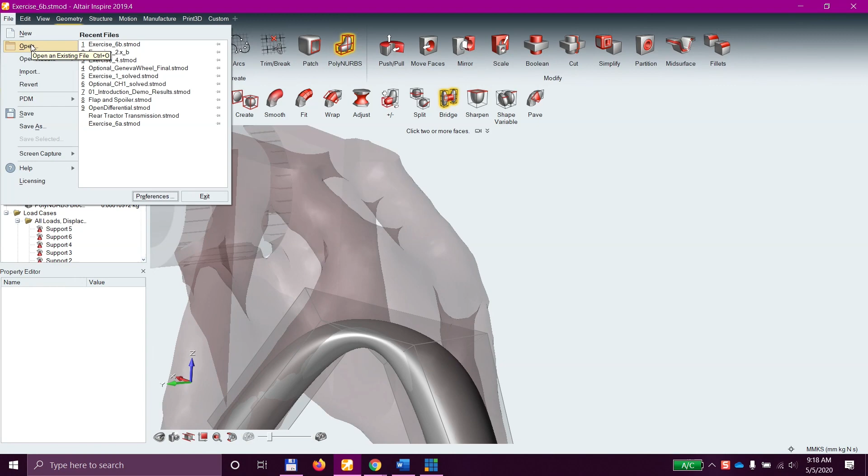Open, don't save, desktop. Give me just a second here to open this up. Where's it at? I think it's in here. Nope, sorry, please forgive me. I don't know, it's in here somewhere. Oh, you know what, I bet I can find it better in there. This is the one I want.

There we go. I can end up with a very nice, smooth part that looks like this.

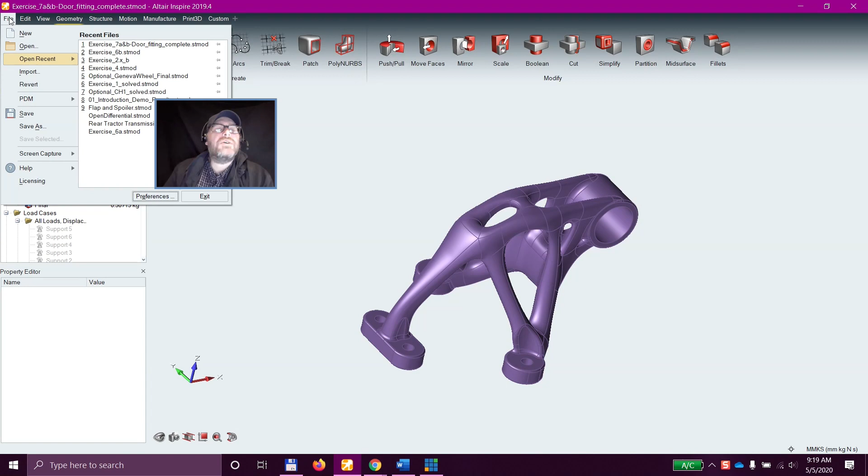What this does is I come to motion, I come to my results here, and it will animate this motion, the motion that I specify, and allow me to see the stresses inside my part as a result of a motion analysis. So not only can I test the dynamics of a system, make sure all of my parts are interacting properly and I'm getting the motion that I want.

The values that are automatically calculated as a result of that motion are then able to feed into an analysis or an optimization automatically without ever knowing what the forces are. I can do analysis or optimization directly from that.

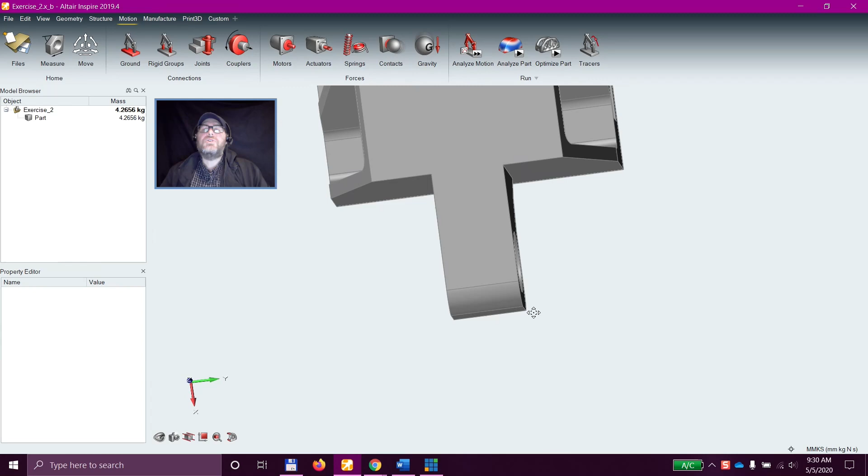You'll see here, even when I pulled this out and made a big block of it, I didn't touch this nose here because I know that my hinge is going to mount, and it's going to go in kind of a U around here. So I need to make sure that I don't have design space material here. And then as this rotates around, it could interfere in this area here, so I'm not going to add material there.

So what you do is you create an intelligent design space that does require a little bit of engineering, because you need to make sure that you don't have material where it would interfere with other things in your design. So while we aren't just going to give it a big cube and say go to town, we're going to engineer that cube, we're going to cut out that cube, we're going to make sure that it doesn't interfere, it does not exceed the design volume that you have.

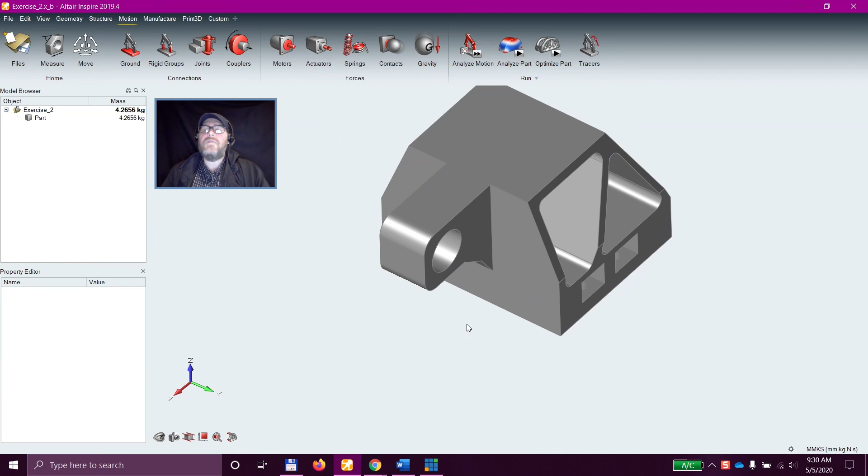But for the most part, yes, after that, it can just be a big block that has your hard points on it, your locations that are critical, and make sure you don't have material where it's not necessary or where it's going to be a problem.

So, great. I guess that's where reality kicks in. I mean, the designs need to allow for some functions, and that function needs to be ensured. That is the reality of most applications.

Another question pertains to the application of loads. When applying loads, how do we know if the figures applied are correct? This is especially difficult for dynamic load cases.

Again, yes, and that's a really good question. In a lot of cases, we are making an educated guess with loads. And also, if you are not 100% certain of your loads, but at least you're certain of where the loads are going to occur and their kind of general direction, if you think about types of optimization you have, maximize stiffness and minimize mass. Minimize mass obviously requires a very accurate load because it's stress-based, but maximize stiffness isn't.

Maximize stiffness is going to create the stiffest part possible based on the orientation of the load, but no matter what the load is, that stiff part is going to be the same. So in a lot of cases, when people don't have the accurate values of the loads yet, they'll run a maximized stiffness, just making sure they orient it properly. The other thing that you can do, especially in a dynamic scenario, is incorporate a motion analysis into it.

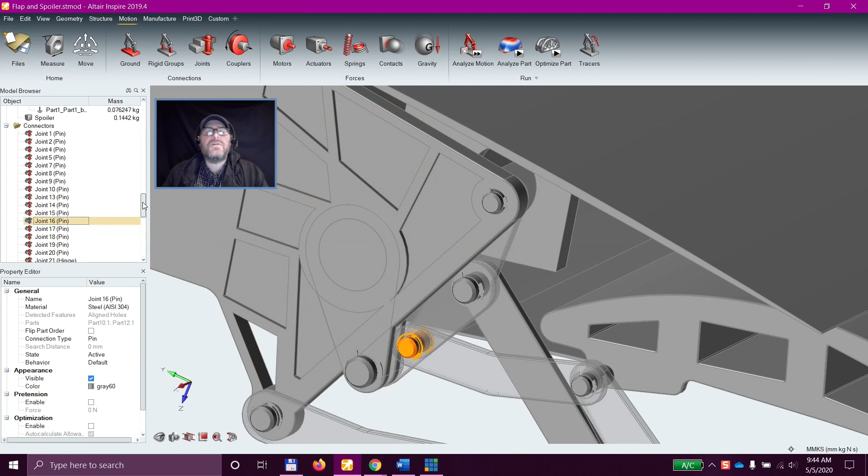And so the dynamic analysis is, I run the motion, and once the motion is run, it's going to actually calculate all of the forces at all of these joints. I can't show them to you since I ran the analysis—those are now incorporated into there. But if I ran just the motion, I could click on that joint and it would tell me what the forces are.

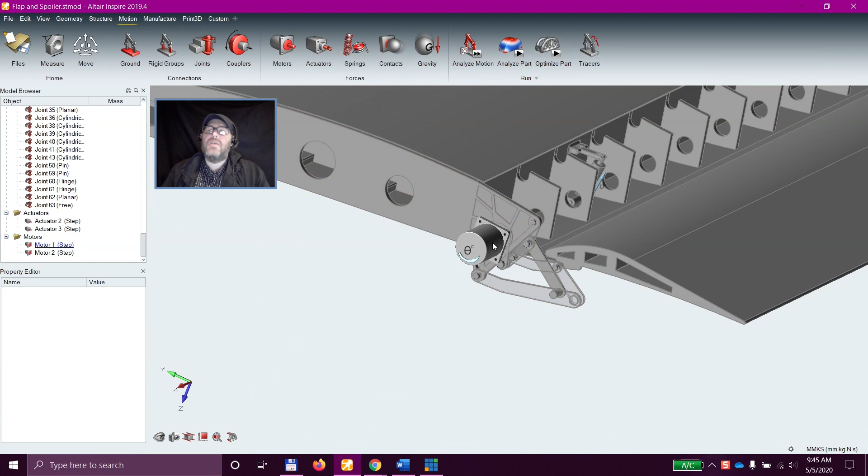And then it takes those forces, and when I run the analysis—motion analysis doesn't run, but if I were to select that, it would ask if you want all of the different steps that it went through. So every step of the motion analysis, it would run an individual linear analysis. So you create a dynamic analysis by essentially stringing together all of the different individual steps in the motion analysis. That's our way of doing a dynamic analysis—it has to be motion driven within Inspire, which can then be run and sent to an analysis.

So, more about the learning tools—where can the participants and the students listening here get the series or chapter videos for Altair? For this presentation, the recording will be available on YouTube. But I guess the question also pertains to other learning materials on Altair. Maybe you can say something about that as well, Eric.

Yeah, absolutely. So your central point for that is absolutely going to be altairuniversity.com. We have a large number of materials in there as well. We've recently posted two 2-hour-long videos. In the fall, we always have what we call our educational webinar series. So Inspire is always there, Inspire Motion is always there, and then we usually have 5 or 6 different other tools. We do a 2-part series, 2 hours each, for our different tools. That happens every fall. I'll figure out a way to make sure we get that information distributed out there.

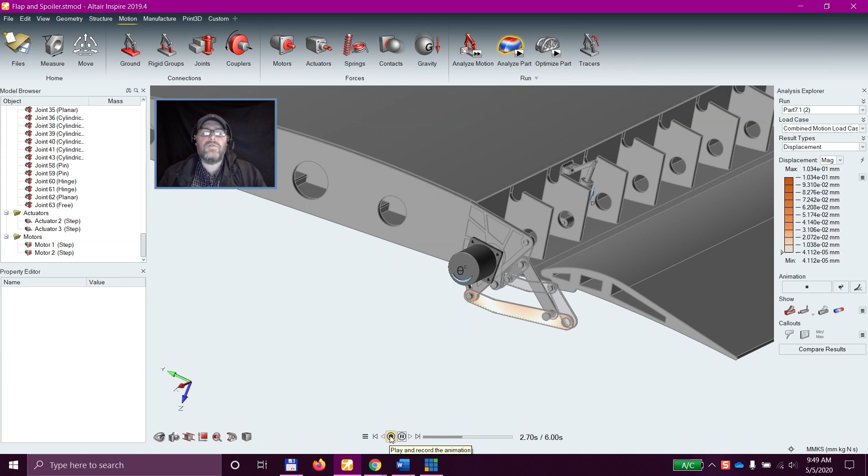Or you can use, I'm a big fan of Snagit, I use that to capture things. But yes, we have the capacity to record an animation directly within Inspire by using this little button. I suppose it probably should be red, be a record button, but that's our record button, and it will create the recording right there in Inspire. So great question.